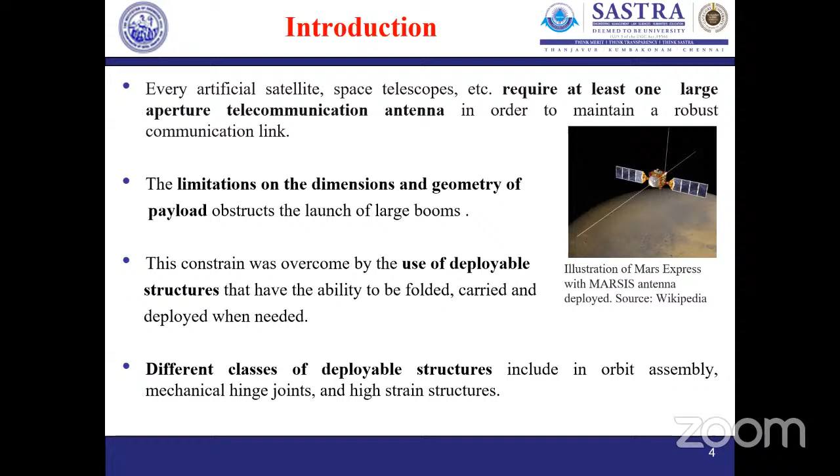I would also like to extend my thanks to my project supervisor, Dr. Srihari VM, Associate Professor in Aerospace Engineering, SASTRA. This is the outline of my presentation. Every man-made structure in space, such as artificial satellites, space telescopes, and even the International Space Station, requires at least one large antenna to maintain a robust communication link. But limitations on payload geometry and dimensions create difficulty in launching large booms. However, this constraint can be overcome by using deployable structures that have the ability to be folded, carried, and deployed whenever needed. There are different classes of deployable structures, including in-orbit assembly structures, structures with mechanical hinge joints as well as sliding joints, and high-strain structures. This work is mainly related to high-strain structures, usually constructed with high-strain composite materials. The motivation for including composite materials in space linkages is that booms made of composite materials are ultra lightweight and have superior stiffness and strength. They also increase packing efficiency with light weight, making missions more economical. The results from this work will be highly significant and relevant to space activities and useful for employing ultra lightweight composite booms in several aircraft mechanisms.

There are many numerous studies in the field of deployable composite booms. For the sake of brevity, I would like to highlight a few studies that are relevant even to my study.

Yee and Pellegrino in 2005 studied the deformation and strains induced by folding of carbon fiber reinforced composite hinge tubes. It was observed that the larger the folding angle, the firmer the tube hinge snaps to a straight configuration. However, we know that the smaller the folding angle, the lesser will be the strains generated.

Mallikarachchi and Pellegrino in 2009 studied the deployment dynamics of composite materials with an integral hinge. It was observed that the stress concentrations were high at the hinge region.

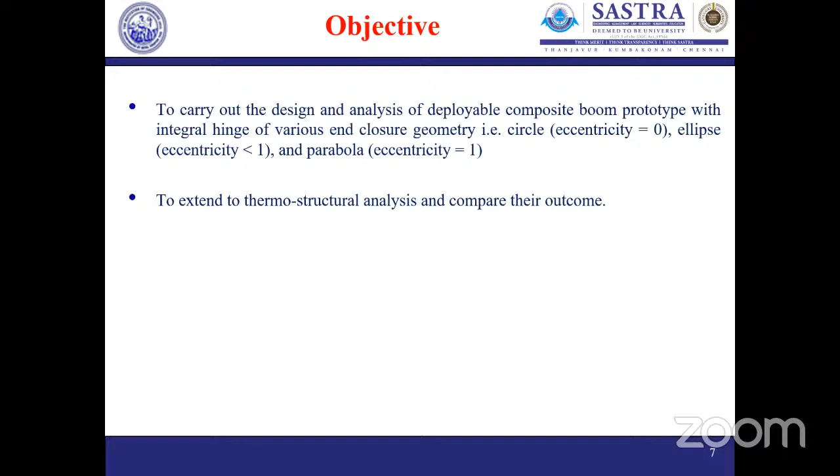Initially, we have performed a few validation studies in order to compare our experimental results as well as the numerical results. We have actually manufactured a deployable composite boom with a slotted hinge and with glass fiber epoxy composite. The material properties were tested at PSG Coimbatore.

In the software work, the boom was given cantilever boundary conditions and a concentrated tip load at the end.

Both the displacement values at both the ends of the slots were determined, which is actually at 75 mm and 155 mm from the root of the boom. It was observed that the deflections produced in the simulation as well as experimental results were more or less comparable.

The design for the current work is that we have designed 3 booms that have dimensions identical, but only the slot geometry is changing. So here, this is a boom having slot with a circular enclosure. The second one has an elliptical enclosure, and the third one has a parabolic enclosure. The coordinate system given here can be used to refer to the longitudinal axis, transverse axis, as well as the radial axis.

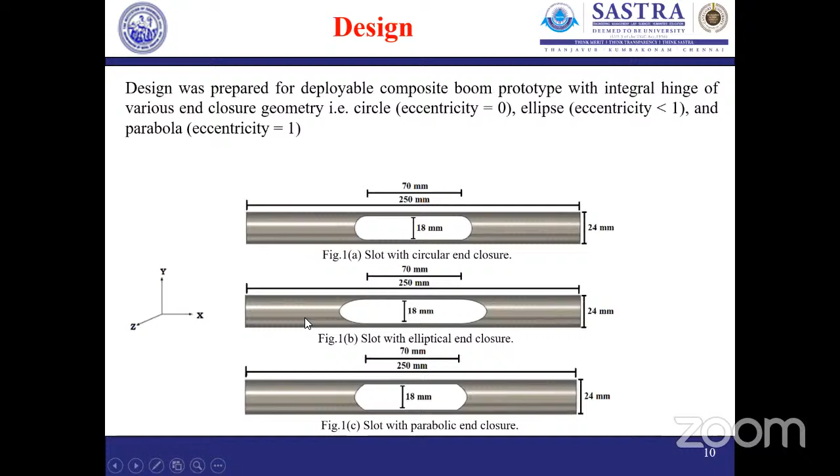Once the design of the composite boom was made, it was assigned the material properties of unidirectional epoxy carbon. Two layers of composite fibers, each of thickness 1 mm, oriented at 45° and minus 45°, were used to create the boom.

So the boundary conditions are: one end of the boom is fixed, and there is a tip load applied at the other end. This tip load was applied in all three directions in order to account for the various loads the boom may be subjected to during and after deployment in space.

From the test, we understood that significant results were found only when the boom was loaded along the direction where the deflections were along the direction of loading. These maximum deformation values were tabulated and are presented here.

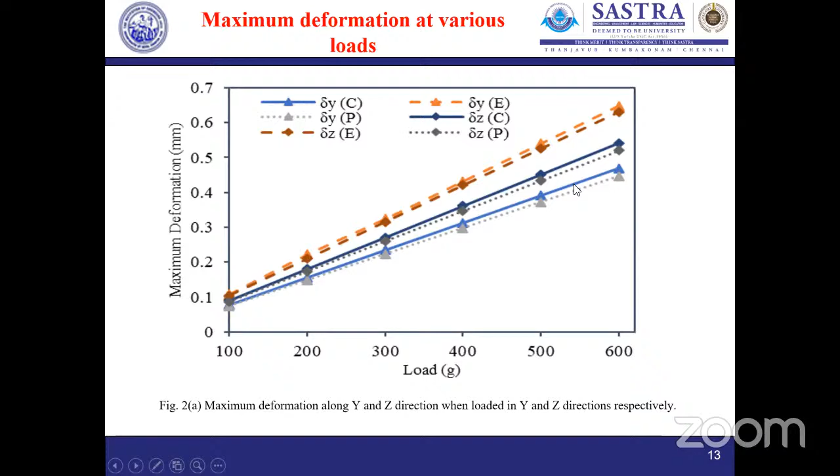Given that the boom can be exposed to various temperatures, an investigation was carried out with a temperature variation of 73 Kelvin to 973 Kelvin. As epoxy degrades at further higher temperatures, cases exceeding 700 degrees Celsius were not explored.

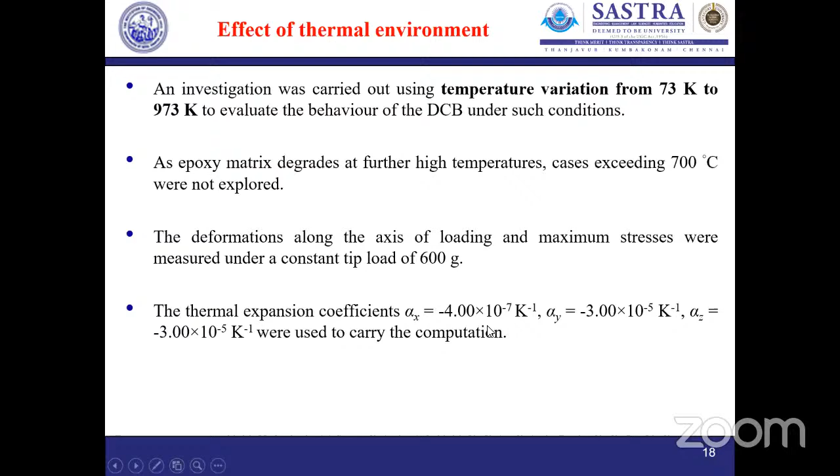Even under thermal environment, the deflections in the elliptical boom with an elliptical enclosure geometry has maximum deformation. But here, the boom with a circular enclosure geometry has lesser deformations as compared to the previous study under control room temperatures.

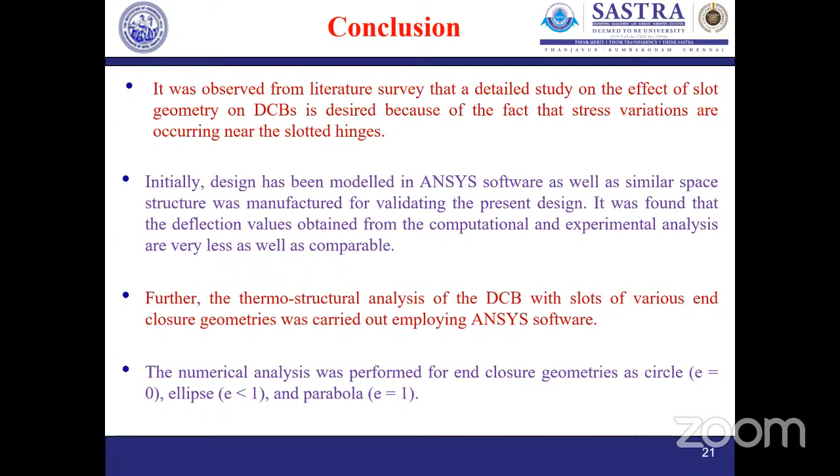It can be observed from the study that the boom with a parabolic enclosure shows a better overall performance under controlled room temperature as well as various thermal environments. The deployable composite boom with slotted hinges of 2 layers has stress strain generated values of lower magnitude, which proves the relevance of the present design.

Thus, it's important to quantify the effect of slot geometry in deployable composite booms with slotted hinges, and several parametric study results are presented to highlight the significance of the present design in space application.

We would also like to extend our study to a lenticular boom, a deployable composite boom with a lenticular cross section.

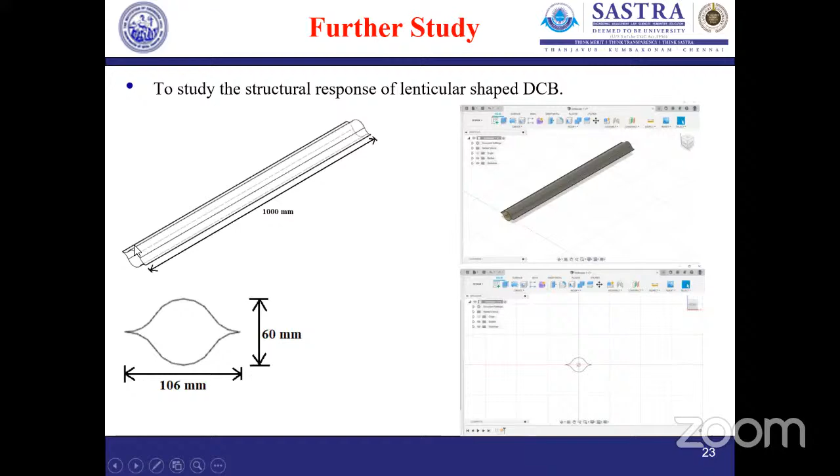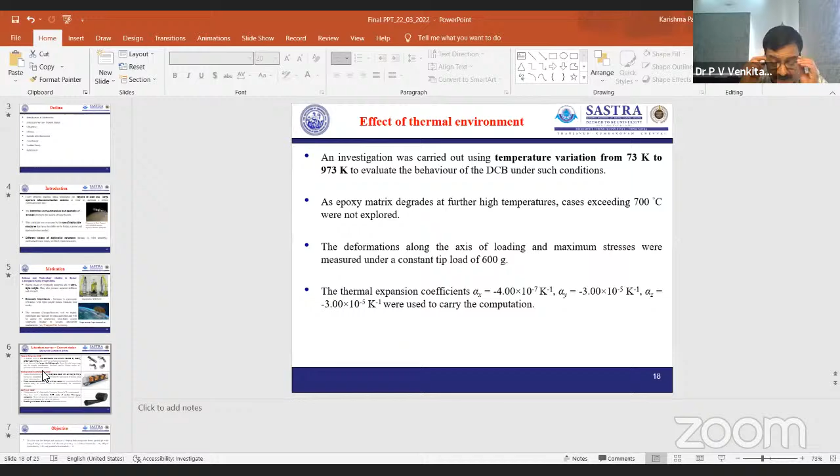And what actually deployable booms are in the space already - once it is reaching the space, you are deploying it. Am I right? Yes, sir. Then the thermal effect is the radiation what is coming. Am I right? Yes, sir. So the radiation will not be uniform actually. The radiation will be different at different times and different angles depending upon the sun, everything and all. So the study was limited to, what temperature have you been varying the temperature from? 73 degree to 973.

And what are the increments you have given for temperature each time? 100 degrees Celsius, sir. So from 73 to 973 is around 8 studies. Am I right? Yes, sir.

Any effect of any temperature load combination? Did you notice anything more, was it linear, or did you notice any abnormality? Because the geometry will not be uniform actually. Deployable antenna geometry also, the hinges and all - it is not a totally uniform structure. So what will be the effect of the combination? Anything specific to some temperature load combination? Anything more or less?

Anything did you infer from the studies? What did you conduct? Sir, we have only considered the maximum loads, maximum stress values. Maximum temperature, maximum load. No, sir. Maximum stresses that will be in the boom.

At what temperature load combination was having the maximum stress? Sir, as the temperature increases, the stress value is going to increase, sir. There'll be more thermal stresses induced. So whatever you showed was linear. Am I right?

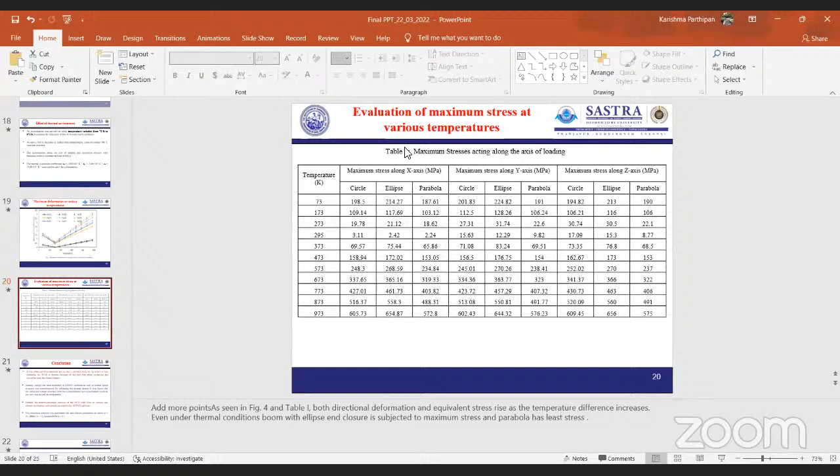No, sir, the graphs shown were almost linear. Am I right? Yes, sir, yes, sir. It reduces and increases. Yes, sir.

So you are concluding parabola is the right one. A parabola seems to perform better than the other two geometries, sir.

Okay, why lenticular? Next study, what is the peculiarity of that particular cross section? Sir, this can be folded and rolled up, so it will consume much less space than the booms.

Okay, so it's a study actually. I would like to comment one thing. The parabolic shape seems to be better, definitely, but there should be some ratio of the minor axis and major axis which will play a role, and the remaining wall thickness. These parameters will also be relevant. Now, you have studied a particular case of wall thickness. Am I correct?

Yes, sir. After the cutting of the particular shape, there is a remaining thickness in the shell. That is one parameter which decides the stress. Then the cross section parabola is, of course, better because it is a better cantilever, if you say that way. But the shape of the length, major axis and minor axis, the ratio also may decide the stress levels.

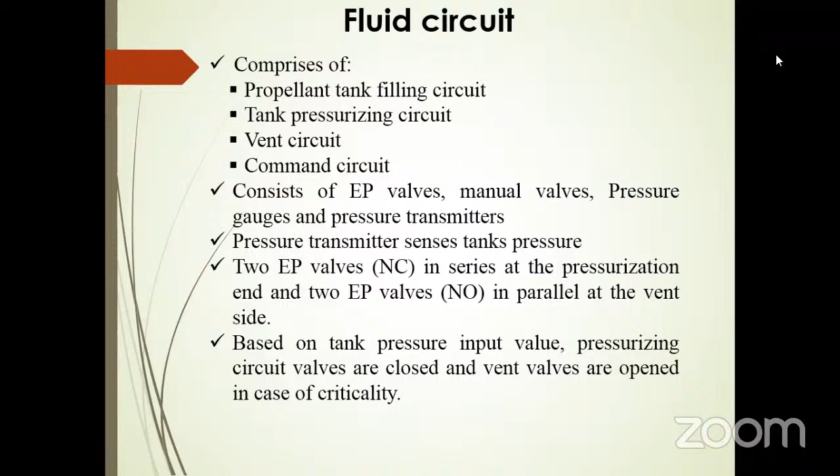For example, if the hardware is a propellant tank, the ultimate pressure of the tank will be mentioned as per mission requirements, for example 9 bar. So if the ultimate pressure is 9 bar, we will set the interlock conditions at 1.03 times 9 bar, that is 9.27 bar. Interlock conditions will be set whenever the pressure of the particular hardware exceeds 9.27 bar.

Whenever the pressure parameter of the tank exceeds this low or high limit, the corresponding safety action will be taken, that is, closing EPV 1 and 2. As mentioned earlier, the two EP valves at the pressurization end, EPV1 and EPV2, will be closed if the limit value is exceeded, and the two valves at the vent side, EPV3 and 4, will be opened.

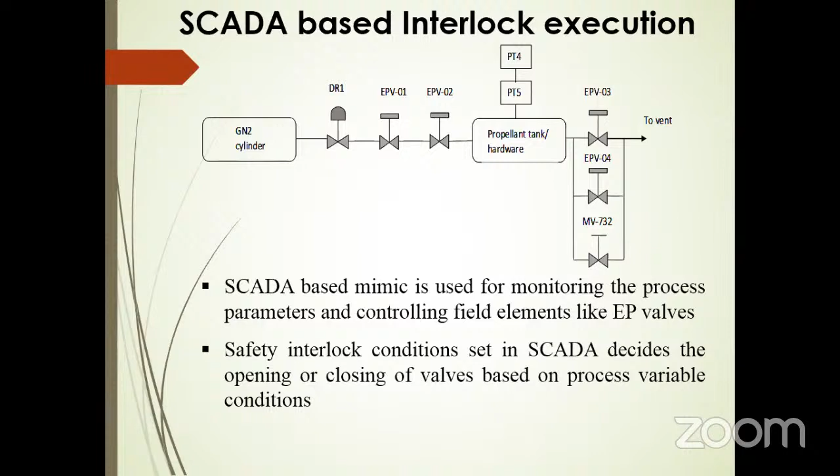Now the question arises: all these interlock conditions are set in the PLC-based SCADA system. So what happens if the PLC fails? We are using a single standalone PLC which can't tolerate any failure. So if the PLC fails, upon exceeding the limit value, there will be a catastrophic failure.

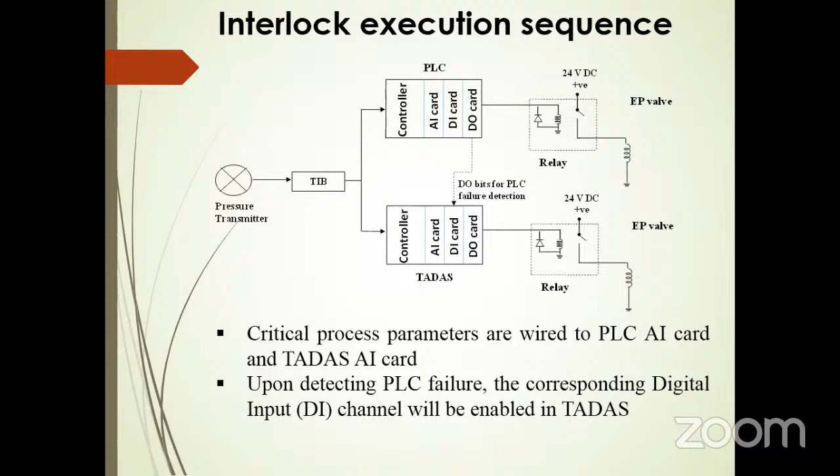Now in the test article data acquisition system, the corresponding digital output bit will be enabled based on the analog input value from the pressure transmitter, as well as the digital input value from the PLC indicating the failure detection. Using the corresponding digital output bit, the electro-pneumatic valve will be actuated based on the interlock conditions.

Now this is the result while executing the interlocks using the test article data acquisition system. The first graph indicates when the pressure parameter comes below 0.7 bar. This is with respect to the interlock table shown in the previous slide, where the low limit was 0.7 bar and the higher limit was 9.27 bar. So the first graph shows when it comes below 0.7 bar, the pressure value becomes 0.699 bar.

During that time, the interlock logic got enabled in the test article data acquisition system, and the corresponding digital output becomes 1. The time difference between crossing the limit value and enabling the interlock was estimated to be 20 milliseconds. Similarly, in the second graph, the higher limit taken was 9.27. When it crosses 9.27, that is 9.271 bar, the corresponding digital output got enabled, and the delay observed was the same, 20 milliseconds.

So these interlock conditions, simulated in the data acquisition system with a sampling rate of 100 Hertz, show a maximum delay of 20 milliseconds. However, in our PLC with a cycle time of 100 milliseconds, the maximum delay for interlock execution was found to be 400 milliseconds.

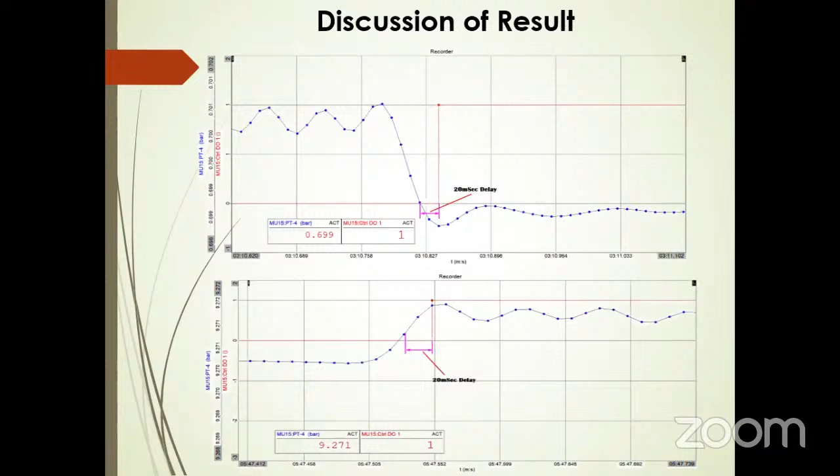You are now talking about more of the logic here than the actual area. Your paper is about the logic you built in and its implementation. Yes, sir, your focus is on that. Yes, sir. Okay.

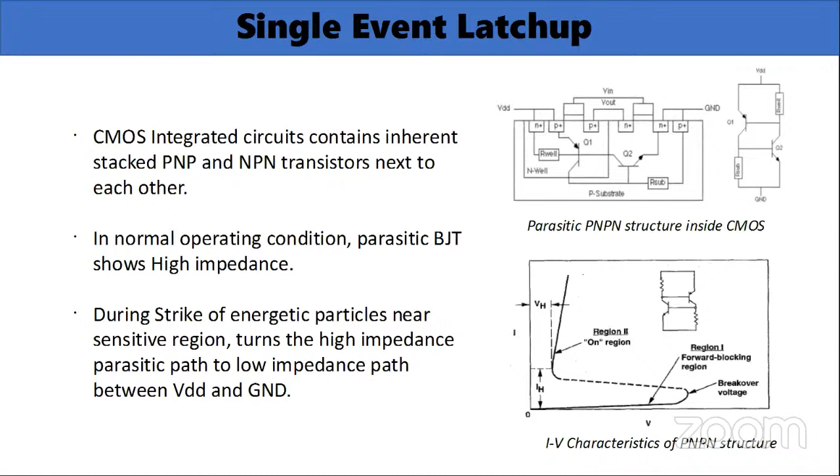Some conventional ways to protect the device from this short circuit phenomena are: first, silicon on insulator technology. According to this, N-well and P-well are made over an insulator, which are further used in making PMOS and NMOS respectively. Due to use of insulator, the parasitic NPN and PNP transistors themselves are not formed, so this technique is free of latch-up events.

However, this process is a little bit costly. Another method is the use of a series resistor, which limits the current and provides safe operation of a device, preventing the abrupt increase in current. But this is not a power efficient solution, because in normal operation also some current will flow through the resistor and it will dissipate power.

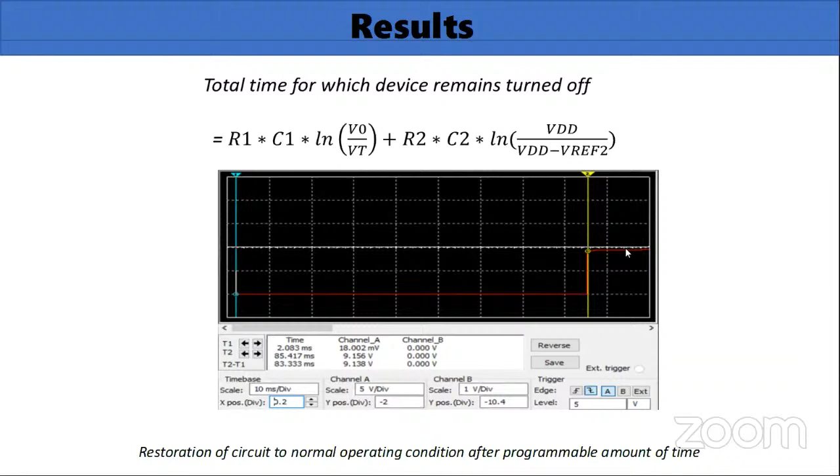So here we can conclude that with the proposed circuit, our circuit provides a current limiting feature with a power efficient solution, ensuring the safety of flight devices. The turn-off time can be programmed as per the requirement of the electronic device, and it has a provision to use with a wide variety of devices. It enhances the reliability of electronic components. Thank you.

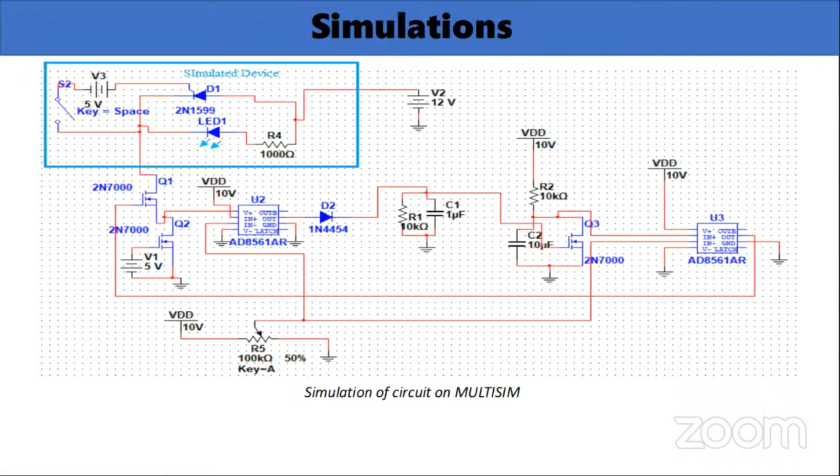Yes sir, because the idea here is whatever the response time of the circuit would be, the current will not flow more than the saturation limit of our MOSFET, this Q2. So whatever the VGS voltage we are giving here, it will just put the device into saturation region such that the current limiting will not exceed the maximum allowed current of our device.

Yeah, so that's a good thing. So there is not going to be any surge because of the introduction of the circuit, that's what you are telling. No. Okay, right. Anyway, it's good study, good product.

It introduces a safety lock in between and avoids a critical failure of the system. Very good, it is, yeah.

Whether your design review, everything is over for this. Actually sir, right now just we have made a simulation on MULTISIM. The design is still in progress, as we will do it. Yeah, probably look at the failure modes also in more detail. Okay sir, it's a good study, of course.

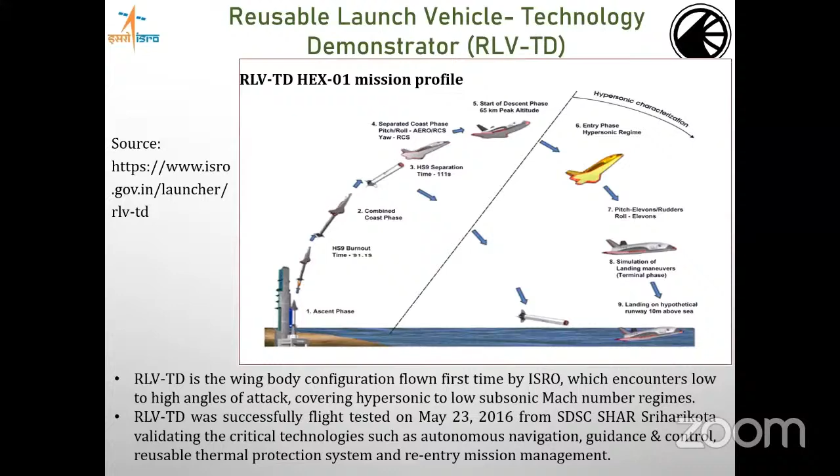So this is where we studied the re-entry characteristics of the RLV body itself. It was very essential, and this validation study was helpful in understanding the autonomous navigation, guidance and control, and TPS systems, that is thermal protection system, and re-entry mission management, which will be helpful for our future human mission project also.

As I said, this reusable launch vehicle in the ascent phase is attached to a solid motor, which I have just touched upon, so I need not go over this again. In this case, basically the various compartments are involved for the venting process. As you can see, the nose compartment, fuselage compartment, wings, vertical tail, elevon, rudder, all these things are there.

But in this study, the wings, fuselage, and nose skin compartment are all interconnected through internal connections, whereas rudder, elevon, and vertical tail are treated as single separate entities. In the ascent phase of the flight, the RLV vehicle is connected to the booster compartment or base load compartment through these wire tunnels, which are shown here. And these fin compartments are also treated as separate ones.

So there are a number of compartments which are there for the purpose of venting. If you see a typical launch vehicle, we have a number of compartments that vary from a payload fairing compartment to a base load compartment, and interstage compartments are also there. So why do we do this venting?

Because as the launch vehicle is on the launch pad, when it is integrated, the internal compartment pressure, or the air volume stuck inside the compartment or structure, will be at ambient conditions, that is at 1 bar. But as the vehicle lifts off and ascends towards space, the outside pressure will be dropping down. And if the entrapped volume of air is stuck at 1 bar, the difference between these two will create a pressure differential, which may cause structural damage if it exceeds the limits.

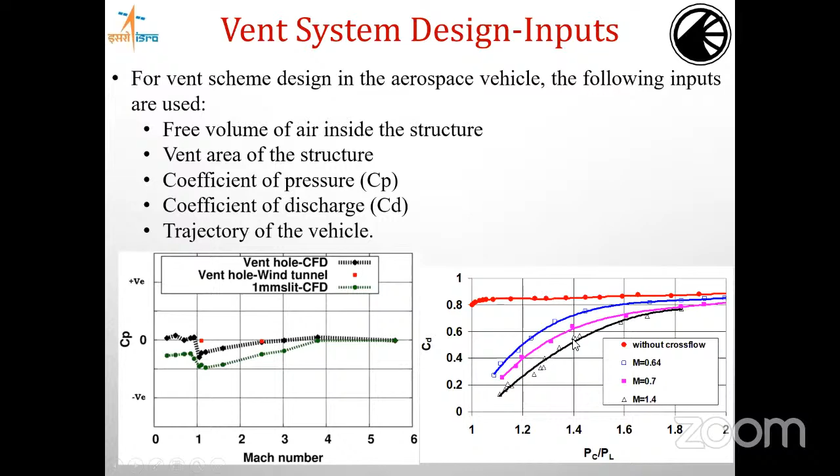So sir, you are seeing coefficient of pressure on the left-hand plot, and these are the typical CP variations what we have observed on the ascent vehicle vent stage. I'll touch upon exactly where the CP values were. And this is the discharge coefficient for the particular vent system which we have flown in the RLV vehicle.

As I said, in this compartment, the nose compartment or the fuselage compartment and wings compartment are all interconnected during the ascent phase of the flight. Hence these have to be vented out through a common path. Since it is not independent, it is attached to the interstage compartment, and further it is connected to the HS9 motor. So the interstage compartment takes care of the vent system during the ascent phase of the flight.

So we are providing venting provision in the interstage compartment. We had 2 cooling hoses which are generally supplied at the launch pad, so that the electronic package sitting inside the fuselage compartment of the RLV is cooled or brought down to the minimal temperature required. We had that also as a venting system, and we provided dia 50 mm vent ports, or vent holes, in the interstage compartment for venting during the ascent phase. So all the air entrapped in the fuselage compartment will be vented out through this interstage.

And further down, it is connected to the base load compartment through this wire tunnel. So some chunk of the volume of air also will be transmitted to base load, and base load has its own venting system which has 6 vent ports in the base load region. So this is all a connected compartment study, and the typical signature is also seen in our conventional launch vehicles like PSLV, GSLV Mark III, and GSLV as well.

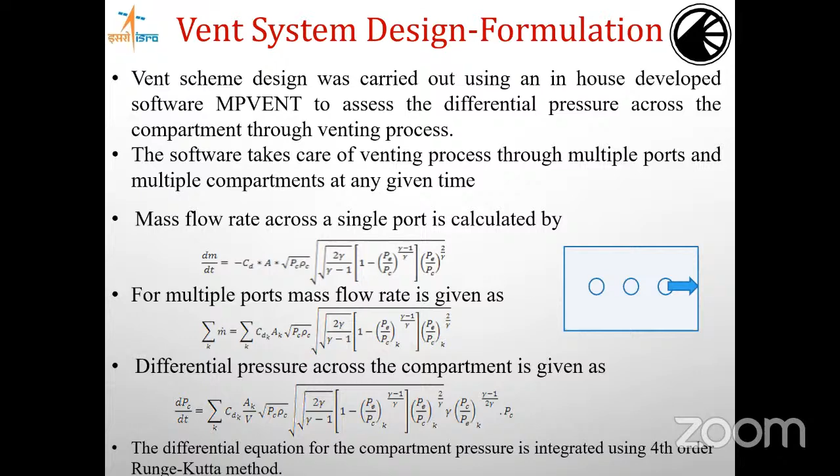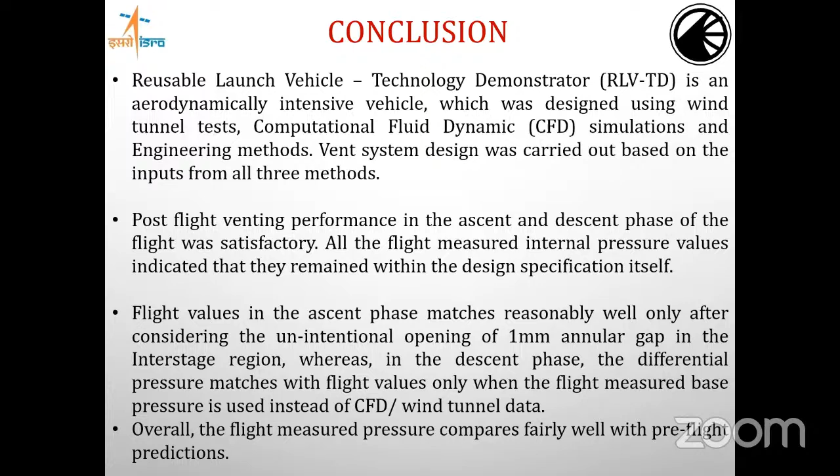Post-flight venting performance in the ascent and descent phase of the flights was satisfactory, meeting our design specification of ±10 kilopascals. All flight measured internal pressure values remained within the design specification. Flight values in the ascent phase match reasonably well only after considering the unintentional opening of a 1 mm annular gap in the interstage region, whereas in the descent phase the differential pressure matches with flight values only when the flight measured base pressure values are used instead of CFD or wind tunnel data. Overall, the flight measured pressure compares fairly well with the pre-flight predictions.

These are the references which have gone into the studies. Thank you, sir. Any questions?

Yeah, thank you, Mr. Venkat Shivanand Yadav. One or two questions I have.

Even though you said in the conclusion that the design has been carried out based on CFD and wind tunnel tests, essentially you have gone by the configuration constraints or configuration requirements. That's what I have seen. For example, the interstage connection below the flight stage, you have vent ports located there. But I feel the aerodynamic characteristics will be totally different in the ascent and descent phase. So some of the ports provided for venting during ascent may be detrimental during descent. Do you have some view on that, or are you using check valves or anything like that? These are the two things I would like to clarify from you.

As I said earlier, during the ascent phase of the flight, we have only vent ports or vent holes drilled in the interstage compartment, and venting was done only through that compartment. But after separation, the interstage compartment will not be there for the descent phase. So the vent system provided in the base region is the only way to vent it and provide the necessary pressure inside the structure. We intentionally created those vent holes and cooling connectors in the base region during the design phase of the study.

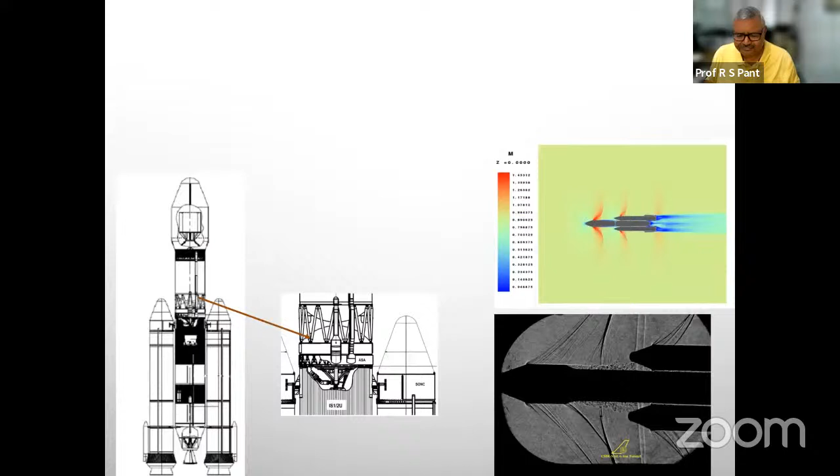This is a typical payload fairing you are seeing on my screen right now, showing the vent port used for payload fairing in GSLV and PSLV type vehicles. Similar unintentional vent areas, as I predicted earlier, are seen in other compartments of the launch vehicle. This is the GSLV Mark III X flight, and there too we have seen this kind of unintentional vent area, which led to the negative differential pressure I was mentioning earlier. So these observations are seen in other flights also, and we have fairly validated this with our own software, MP Vent.

Okay, thank you. Anybody else have questions? Otherwise we'll move to the next paper. Okay, thank you, Shivaram. Thank you, sir. Thank you for giving me this opportunity.

Sir, one small interruption here. Actually, Mr. KM Kiran Babu — Mr. KM Kiran Babu, are you ready to present your paper, sir?

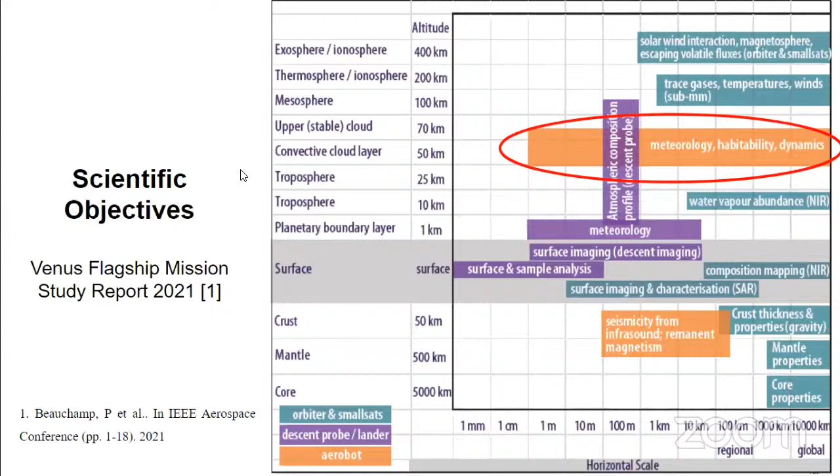According to the Venus flagship mission study report, aerobot systems, that is lighter than air systems, are perfect for carrying out atmospheric dynamic studies in the upper atmosphere of around 50 to 60 kilometers. If you look at the horizontal scale, the requirement is global circulation and global measurement in the Venetian atmosphere. In this region, the atmospheric properties are comparable to that of Earth, and materials are available for balloon systems.

Previously, there have been multiple missions to Venus, and among them, Vega balloons have demonstrated the flight of balloons in the Venetian atmosphere. From these missions, various atmospheric properties had already been collected, and a Venus International Reference Atmosphere model was developed by NASA, which we initially planned to use for these atmospheric simulation studies.

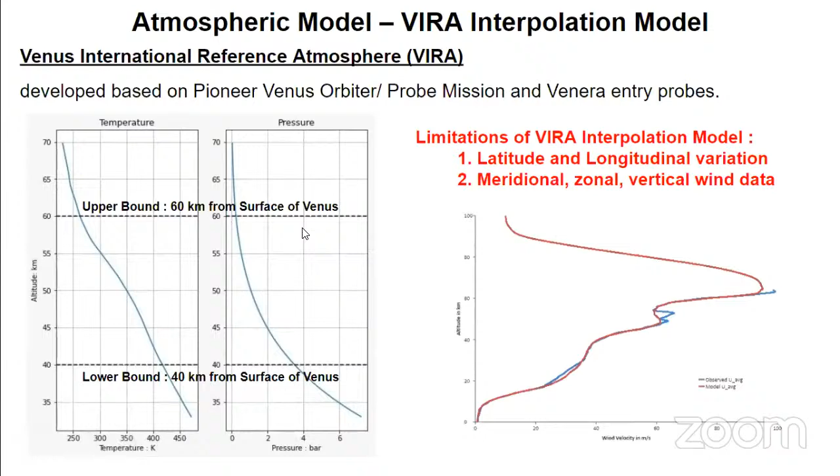However, there are certain limitations of this atmospheric model, in that the latitude and longitudinal variation of atmospheric data is missing, and the wind components in this region are also missing. Therefore, we approached Dr. Sebastien Lebonnois of LMD Lab and Dr. Prashant Kumar of Space Application Center and obtained the general circulation model data to have atmospheric variables and wind parameters in 4 coordinates, namely altitude, longitude, latitude, and time in the Venetian atmosphere.

This atmospheric data was interpolated in 4 dimensions with a linear interpolator to couple it with the trajectory simulation. Coming to the superpressure balloon, it is usually partially filled at launch and gains the float altitude at its design volume.

In our current model of trajectory simulation, we have also considered the thermal heat transfer that happens because of the atmosphere on the balloon film, as well as the lifting gas. So we first developed the trajectory model for an Earth balloon and validated it with the HASI balloon flight, and then we adopted the trajectory model for the Venetian atmosphere.

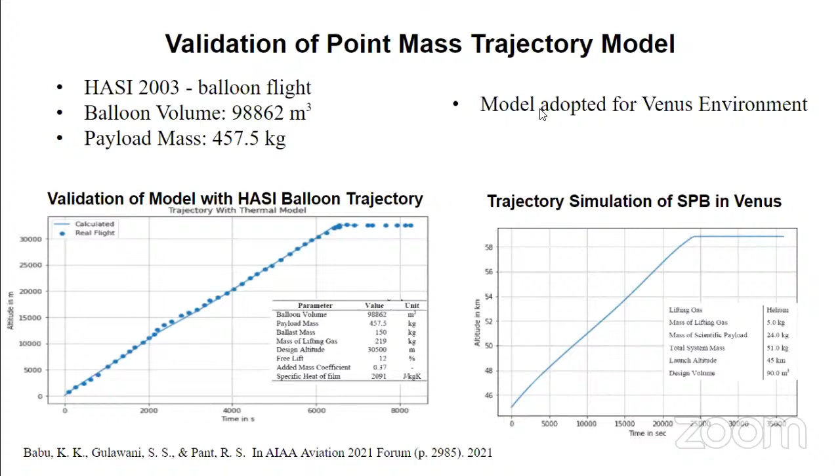Please proceed, any problem? Got stuck, Mr. Ashok? Maybe any internet issues, sir. Mr. Ashok, are you there? Mr. Ashok, can you hear us? Ashok Kumar, you mean Ashok Kumar? Yes, Mr. Ashok Kumar, sir. Yes, I am able to hear you, but I'm not seeing anything on the screen.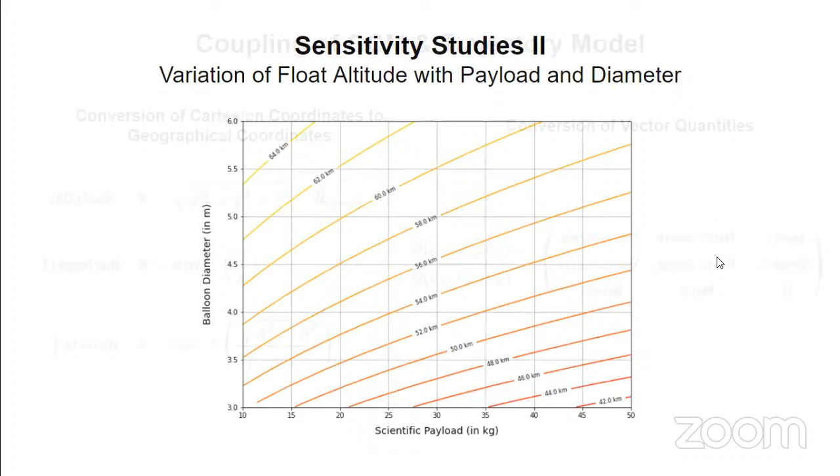Trajectory model for carrying out simulation of the float phase, which is essentially the circumnavigation around the planet. For that, we had to convert the Cartesian coordinates into geographical coordinates, and similarly the vector quantities for velocity were converted from zonal wind, meridional wind, and vertical wind into the Cartesian system.

We finally got the circumnavigation trajectories. The balloon was released from 50-kilometer altitude at 3 different latitudes and 0-degree longitude. It was observed that the revolution in the northern and southern hemisphere covers more area, completing around 2 circumnavigations, so 2 revolutions.

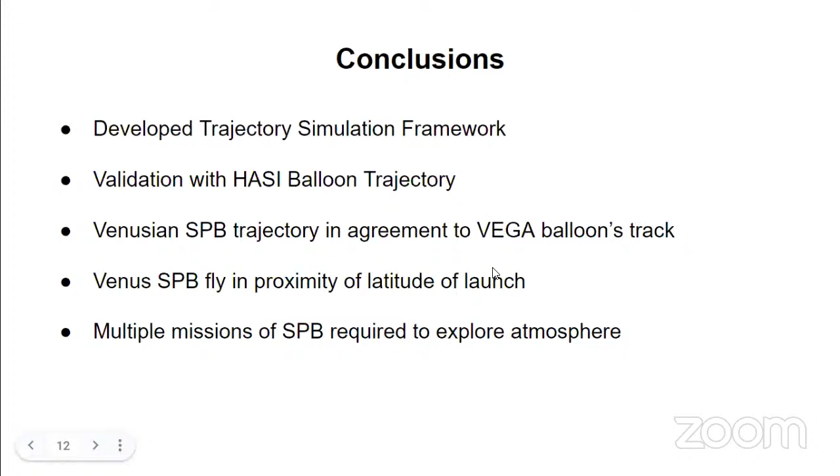Finally, we conclude that we developed the trajectory simulation framework and validated the trajectory with the HASI balloon experiment. When a superpressure balloon is flown in the Venusian atmosphere, it covers area in the proximity of its launch latitude, and therefore it will require multiple missions of superpressure balloons to explore more area of the Venusian atmosphere. Thank you.

Thank you, Kiran Babu. So the question session is on, any questions? Okay, I think we will go to the next paper then.

So right now, Mr. Jitendra Singh is not in the panelist list. Professor Pant will be sharing that paper. Is he available, Professor Pant? Just before he was here, but right now I don't see him in the panelist list. He's just joining. Okay, Dr. Rajkumar S. Pant.

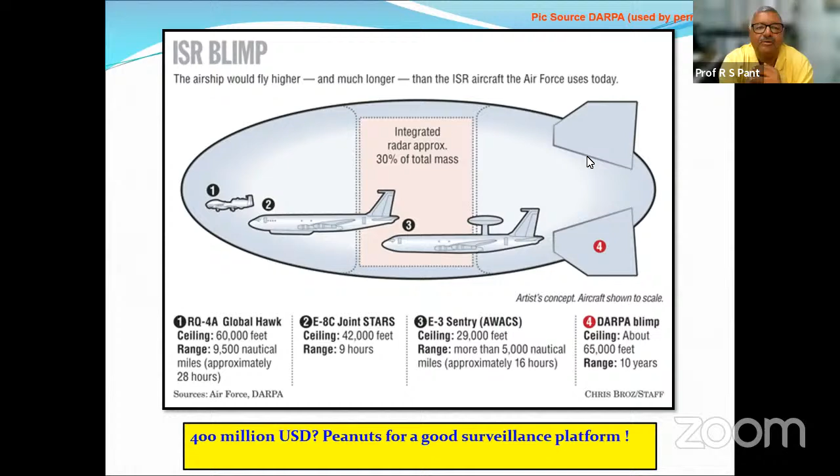Now, as we are looking mainly at military and paramilitary roles in this presentation, we notice that several applications can be tackled by the use of high altitude airships. In the current scenario of our country, when we are grappling with two unfriendly neighbors at both edges, on the western side as well as on the northeastern side, immediately one can look at any of these as a relevant application for the high altitude airships.

There are many similar roles, but I'm not going to focus on that much today. I always say that applications are generally limited by imagination.

Now, many people would argue that since we have satellites and our country is known for very cost-effective satellite deliveries, then why are we looking at airships? The reason is that we are going to make this airship behave like a low-altitude geostationary satellite. As you know, geostationary satellites normally fly at very high altitudes, and because of the huge distance, we do not get the required amount of clarity many times. Low Earth orbit satellites have better clarity, but then they are not able to maintain station.

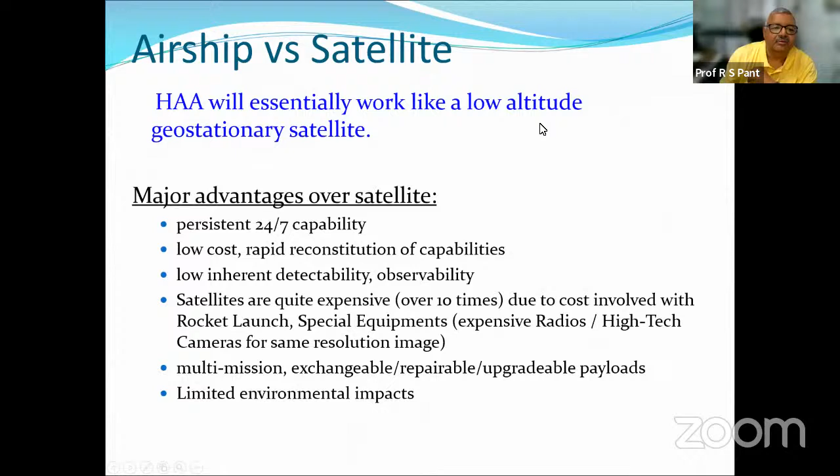In the Indian context, there are many applications. We could cover our entire country and its sovereign borders using just a handful of aerostats or high altitude airships. For military and paramilitary missions, there could be applications which are the need of the hour, as mentioned in this slide. Even civilian applications like resource mapping or supporting other activities from a safety point of view, refineries, etc., show that there are many possibilities.

It can also be relocated so that it can monitor the area of interest. And as I already showed, areas of interest can be covered by a swarm of high altitude airships.

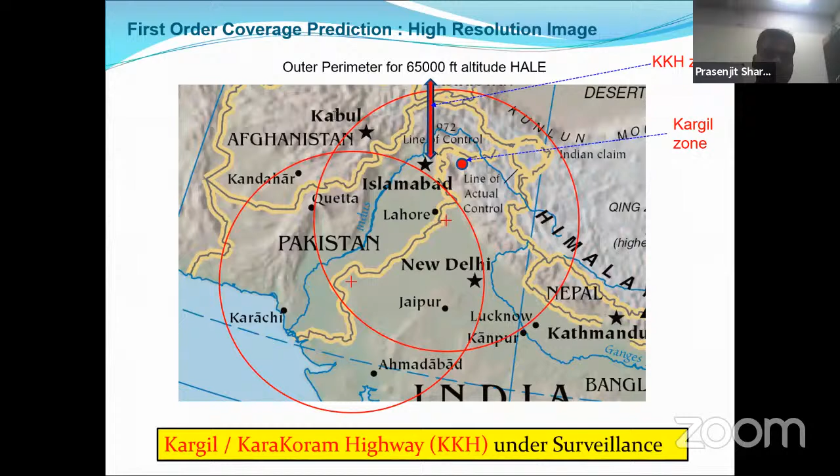In the context of our neighbors, the Karakoram highway and the Kargil zone is an area where there is a huge requirement. If we are able to position these over the sovereign territory of the country, as I have already achieved, you can see that with two of them we can cover almost the entire area of interest, on both the Chinese front as well as on the Pakistan front.

To focus more on the Karakoram highway, which is the connection between China and various cities in Pakistan, locating a system within the line of control or within Indian territory or Indian controlled Kashmir territory can easily allow us to look at what activities are happening and take decisive and preemptive action well before the activities become difficult for us to manage.

Similarly, there are other areas highlighted here in this figure which can be monitored very easily.

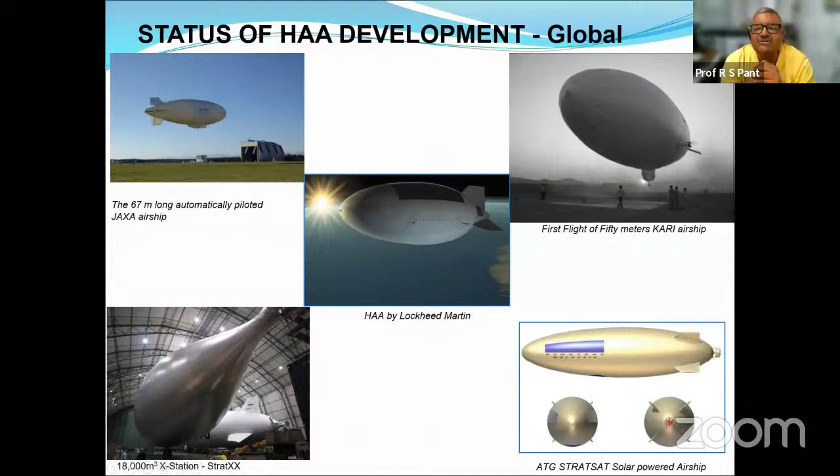But then there are lots of issues and risks which we have to handle. There are several technologies which need to be mastered and developed, and there are also certain areas in which we are behind, as I will elaborate in the slides as we go ahead.

So the question that arises is, all this is okay, but does India need a high altitude airship? Definitely we have a need, and more so in the current scenario. So what are the technologies which have to be developed?

First of all, the basic envelope itself at such a large size, we cannot use existing materials which are very heavy, and also the fabrication techniques have to be improved. You cannot carry any conventional power plant system for a long endurance application, so we need to look at solar powered systems with regenerative fuel cells.

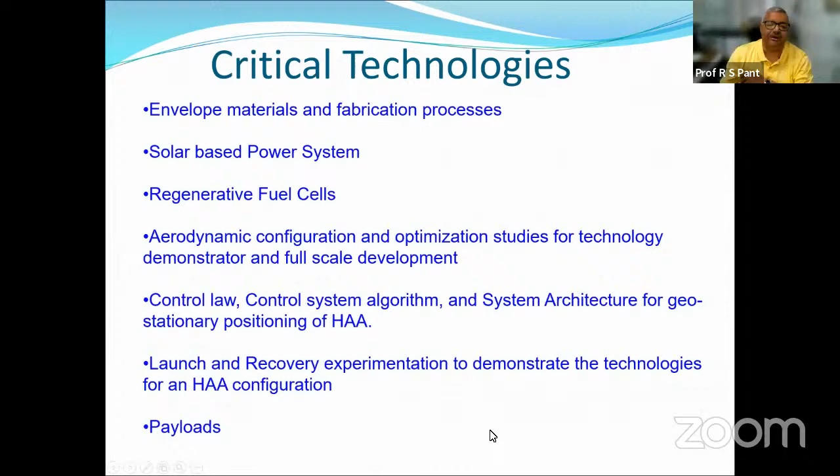As we have already done, a lot of aerodynamic configuration and optimization studies are needed for the full-scale development. The control of the whole system has to be mastered. Launch and recovery of such a large body is going to be a problem, and remember, it has to also go through that location of very high speeds.

We have to also develop the required payloads to do the mission that is required. So in the next few slides, we'll highlight, based on our study, what technological jumps are required. For instance, the target fabric that will go on this airship should be less than 100 grams per square meter, or GSM as we call it. In India currently, we are looking at around 250 to 300 grams per square meter.

The pioneer in this particular area is ADRDE in Agra, the DRDO laboratory, which has done a fantastic amount of work in the development of technology of LTA systems in the country. They are the leaders in this technology in the country. But they need to be given a lot of support and encouragement, because the requirements are that we need to improve material by 3 times, improve fabric strength by 2 times, and permeability is going to be a huge issue.

Similarly, on the solar cell front, we need 20% improvement and 4 times improvement in the power density, in watts per square meter. Especially looking at solar cells, there are many challenges and a lot of research going on in the country. We at IIT Bombay are also working on developing these kinds of cells under one of our National Centre for Photovoltaic Research and Education.

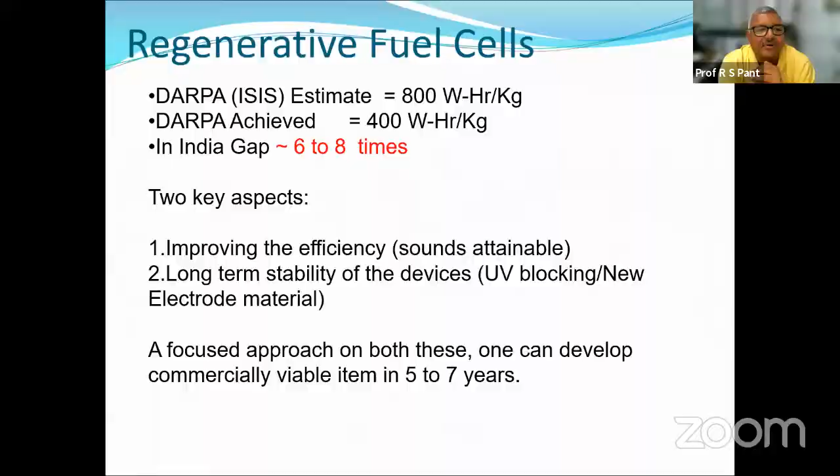I'm actually unable to give more than I have. So with that, I'd like to stop and open the floor for any questions that you may have.

Helium permeability. Any metal coating inside the fabric or anything like that can be considered?

Yes. First thing I want to clarify is that for such a large platform, we cannot think of using helium in a sustainable manner, because...

I think there are some network issues, sir got disconnected. But he is probably not aware, he is continuing. I think there is a problem here. Yeah, we are losing connectivity. Yes, sir, right now.

I'm just saying that helium is not going to be a sustainable solution for such a large airship. We definitely have to go back to hydrogen as the lifting gas. Even though there are dangers in using hydrogen as a lifting gas, and we all know people are very scared, there have been several studies done, even in IIT Bombay we have done experiments in the field to show that handling of hydrogen, if done very carefully, can be considered as an option. Because if you go for helium as a lifting gas, then your system is going to be almost unsustainable from the point of view of logistics and refurbishment.

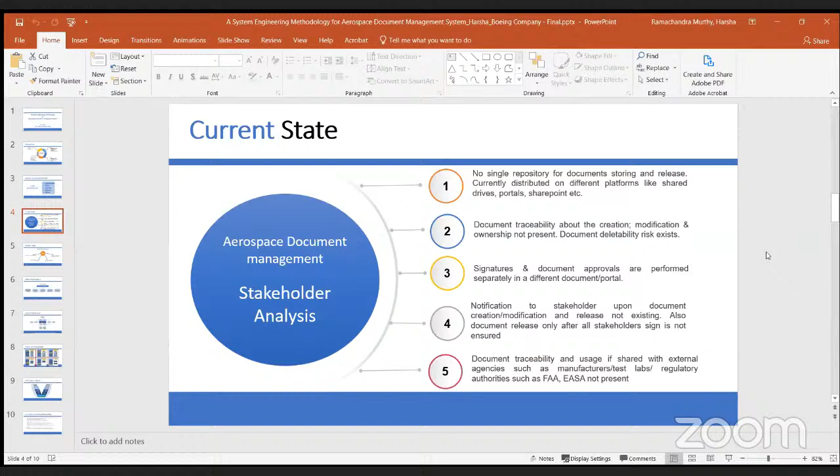And finally, these documents, when shared with external vendors - manufacturers, test labs, or even regulatory bodies like FAA and EASA - how they use our documents and where they flow down, we had no clue about it. That's why we also wanted to bring that online within our system, to understand the traceability of our document once shared externally. So these were some of the major points we listed as the current state, what was there previously, versus the desired state, what we actually want out of this newly developed system.

That is, we will have a common repository which will contain all the documents as a single platform for document storage. Then document details of creation and modification, that is, the traceability and modification details have to be tracked every time it is done.

Third one is the signature and document approval should be embedded within the system. And finally, notification to stakeholders for creation or modification of the document will be there. And all of this will contain the system to trace back when it is shared externally as well.

So these are some of the common pointers, and we noted this as our first step in defining requirements, in systems engineering language, as an integrated platform which will have a unified platform for document storage, metadata recording, approval and signature, notification, and access with data security, that is configuration control. Then, how do we specify the performance of our document management system?

The integrated platform, if we read it as a cyclic flow, we will be checking in the documents, that is, we'll be starting to store the documents in this integrated platform. Once it is stored, then it will undergo a review, that is, actual review by the stakeholders.

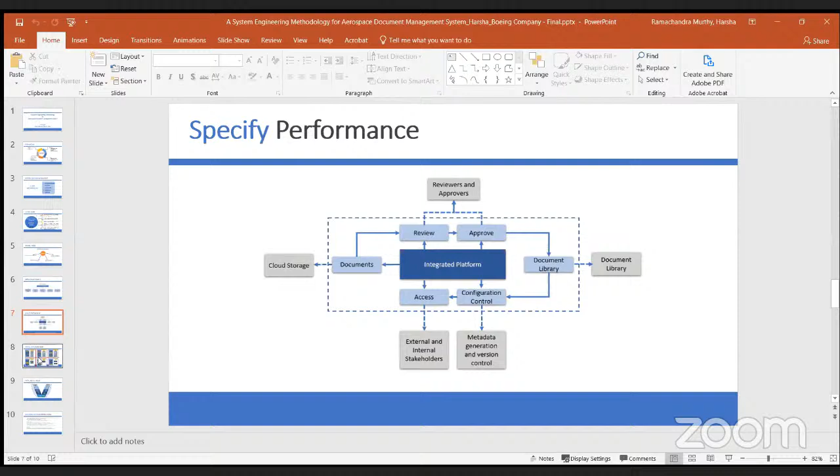Yeah, this looks a bit crowded. But nevertheless, I'll briefly discuss one of them, and I think the rest of the things are similar. And this is not exactly the way we have put it across in our organization.

We have a proper user interface, but unfortunately, I could not get the approval to share that externally to this forum. So that is the reason I've just put up these block images to share what we have done. So in this integrated platform, as we defined all those requirements, we had these basic six modules which were developed.

One is for the documents, that is, if at all a new document is to be created, or upload an existing document, check in a revised document, and finally download for all stakeholders if they want to download a copy of the document.

So the review process of the document, where we assign stakeholders, we put an end completion date, when do we need the document to be reviewed, then what is the priority, and then finally, after all these inputs have been done, route it for review for the stakeholders.

Then approve, similar to review, where the signatures will be done. And the release, where once all the signatures are done, then the release process happens, where the document is available as a released document. And for configuration control, once this is checked in, the document will be assigned proper numbers and versions.

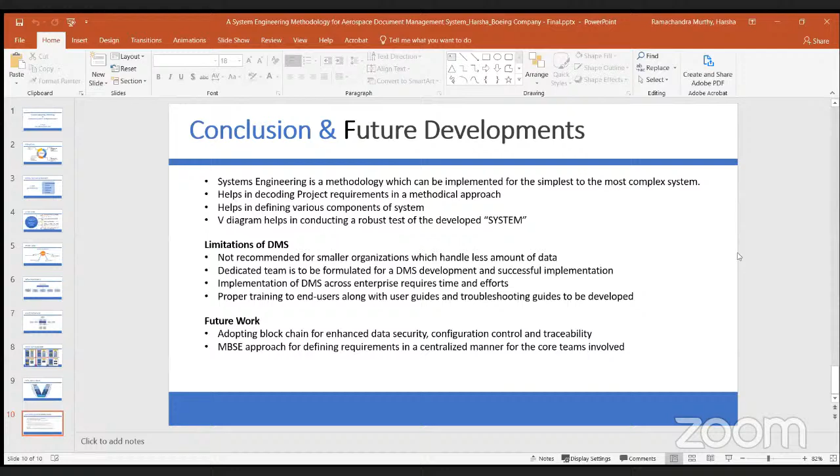Thank you, Harsha. It was different altogether because you are all aware that when it comes to manufacturing, translation to reality from drawing and documents to systems, especially companies like Boeing, whose supply chain is going across continents and countries, systems if they are not in place can really cause a lot of harm to the product as well as the actual final product, and all these things are very important.

One thing I would like to share here is that what you told is systems implementation can make huge profit. That's one message you have given very clearly. The profit is not by sales alone. Lean manufacturing, from Japan and all, addressed value engineering, but they addressed actually the product and product-related features only. System-related features can add value to engineering, and lean manufacturing can contribute to manufacturing. It's one important concept which we have followed but forgotten actually.

Here, you have told very clearly that by implementing the system, you've got a huge profit. And that is one message people have to carry, because a system which is in place is equal to a robust company actually, because people can change and systems can continue. That is the importance of systems engineering, which you have very clearly given.

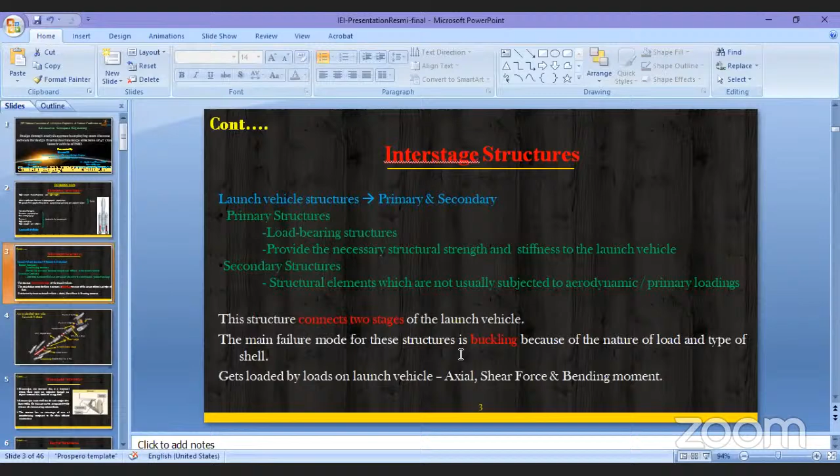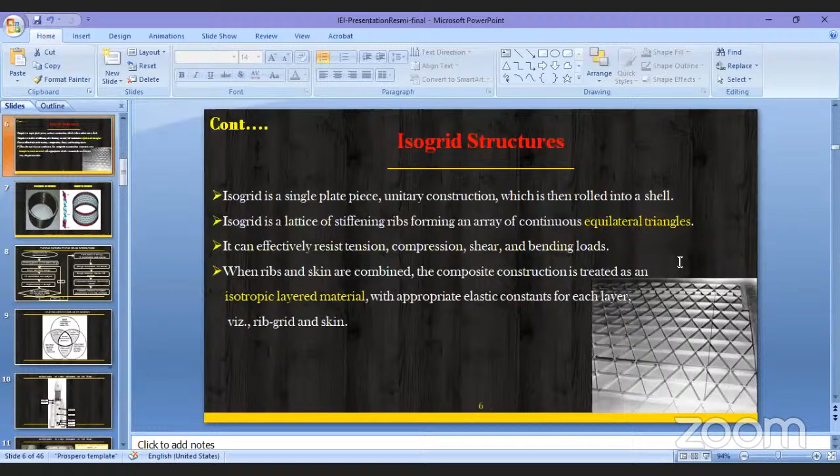We have different types of constructions available, like monocoque, closely stiffened, isogrid, waffle, etc. Monocoque is similar to an eggshell, with a skin alone. If you strengthen it with ring stiffeners and longitudinal stiffeners, you get a closely stiffened construction. If the stiffeners are very close together, these are closely stiffened structures. There are also equilateral triangle arrays of ribs - these are isogrid structures, which are effective in resisting tension, compression, shear, as well as bending loads. There are closed isogrid and open isogrid, where we use vented interstages.

And after all these things, we may have to release a design drawing. And all this cycle involves the reviews, proper reviews, addressing, and the design drawings are involved.

From there, we may have to fabricate the structures by giving the corresponding tolerances, and fabricate the structure to meet the schedules. So all these things involve a very good team effort, including not only the design team but also project activities, fabrication team, and design drawing support.

Then hardware realization also will help us validate our design. Of course, one method is analysis only, but for analysis also, we have to validate through the structural qualification test. Then only we can go for the flight readiness of the structures and qualify the structure for flight. And there is different interplay between the designs.

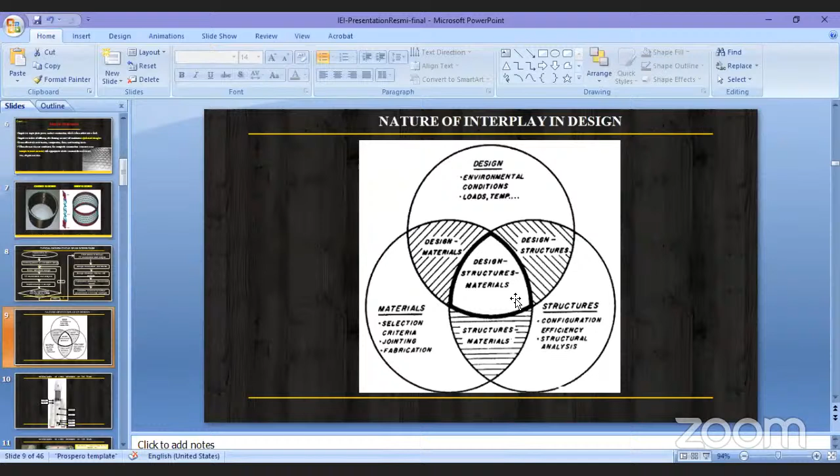We have to consider the lightweight aspect as well as stress available, depending upon the material we are choosing, what should be the limitation of stress we can go for, without any failure mode.

We have designed so many structures, but because of time limitation, we will only talk about two structures - the one-dual structure and core base shroud structure.

Coming to the interstage structures, this one-dual structure configuration itself - I have touched upon the different types of constructions available. This closely stiffened structure is this configuration type, and this diameter is 4 meter diameter and 1.6 meter height, made up of aluminum alloys.

This right side indicates our structural configuration, and most of these structures have different planned cutouts for taking out the propulsion systems and other activities. What we are seeing here is a helium gas bottle placed on the structure, for which we have to give support inside the structure also.

So these bottle things are the helium gas bottle, and these wires have to be taken out. So all these cutouts are introduced - some will be for wire tunnel cutout, and some will be acting as an access cutout.

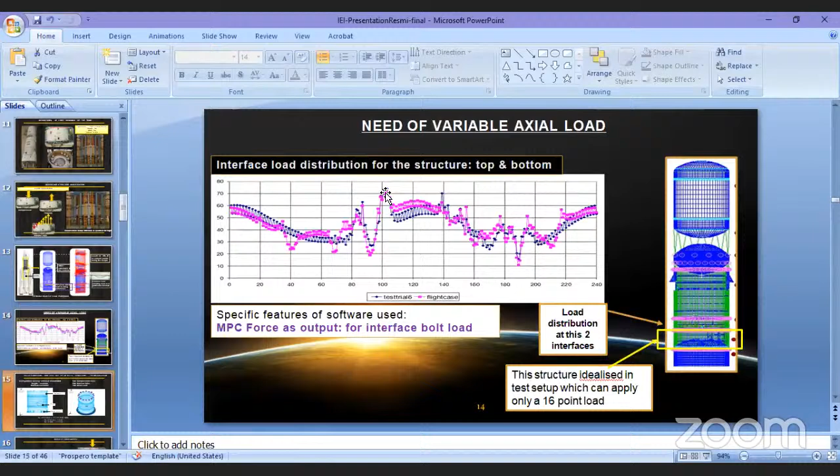And there comes a different software. We have expertise in many softwares available, like Patran, then Nastran as a solver, then Abaqus, then NISA. We also have an in-house developed software called FEAST, finite element analysis for structures. Since with bought-out softwares we have to pay for annual maintenance each time, we thought of doing this analysis also as a comparison with the in-house developed software, as a Make in India policy. So this is a representation of the FE model in that finite element analysis software.

And these are the loads we are applying, similar to what we have seen in the structural test setup. Similarly, some jack loads are applied. Same loads we are applying in that FE analysis, and the boundary conditions also applied. There are different kinds of elements, depending upon the structure, shell, beam, and stringers are idealized as beam elements, and shell as shell. Then interface fasteners are modeled as MPC, as I told earlier, MPC connections are there to find out the interface loads.

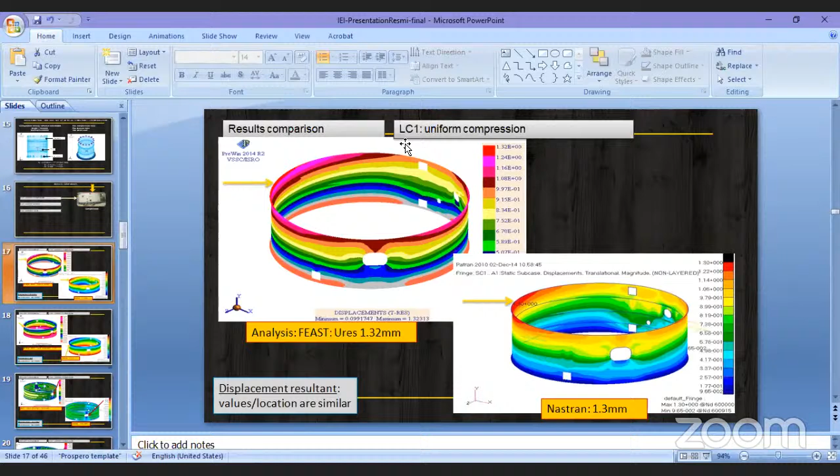And these are the comparisons of the 3 load cases we are touching upon, comparisons with respect to the finite element software FEAST. We have a comparison of the displacement resultant of 1.32 versus 1.3 in Nastran, and analysis also 1.32 for the comparison of the axial versus 1.3. And this is also against the stresses comparison, corresponding to stress resultant von Mises stress, and these are the circumferential stresses.

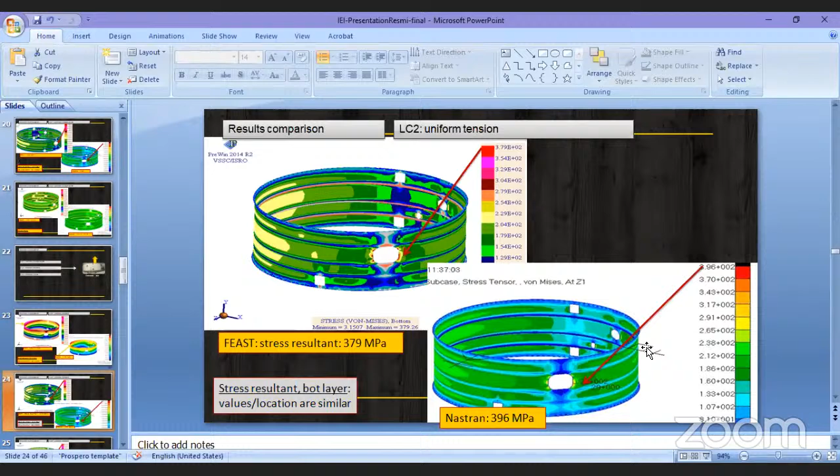And next case, we are touching upon the tension condition. We have a comparison for the tension condition also, 5.1 as a deformation against 5 in the Nastran package, and this versus stress comparison.

And for the cutout also, we basically have to see the cutout strain nearby. We should not exceed the capacity of the material. So we will be monitoring the strain during our structural qualification test also. We used to have a lot of measurements to know what is the actual stresses acting on the structure and deformations also.

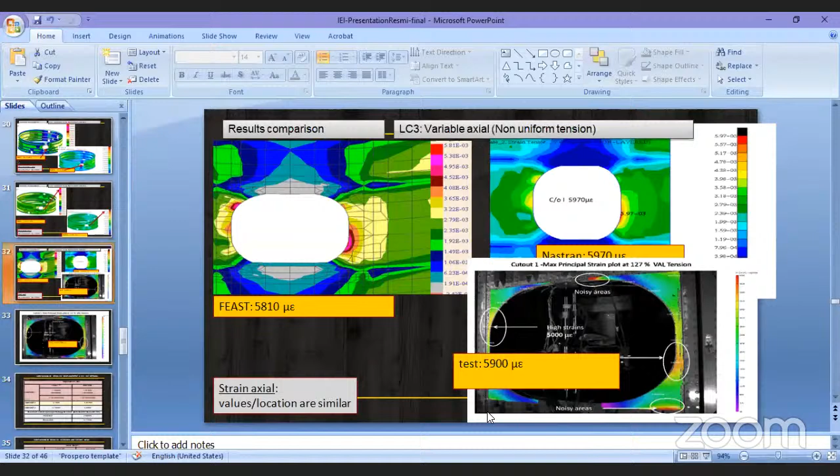And this is one example for the variable axial load, I was mentioning about the bending moment acting on the structure. Sometimes we have to go for a variable axial load also, and at that time also we got a good comparison. We have experimental setup also planned to measure the cutout strains nearby, and we got a reasonably good match with the prediction from most of the softwares.

And this was the overall comparison of this one dual structure, the displacement and the cutout, whether it is opening or closing. We may have to predict, as well as find out the measured values also. And this information is required for finalizing so many plans later also. Sometimes we may have to place some motor inside the structure, so this contraction, how much will be the contraction? Depending upon that, how much slot we have to plan, so all these things are required for our future work.

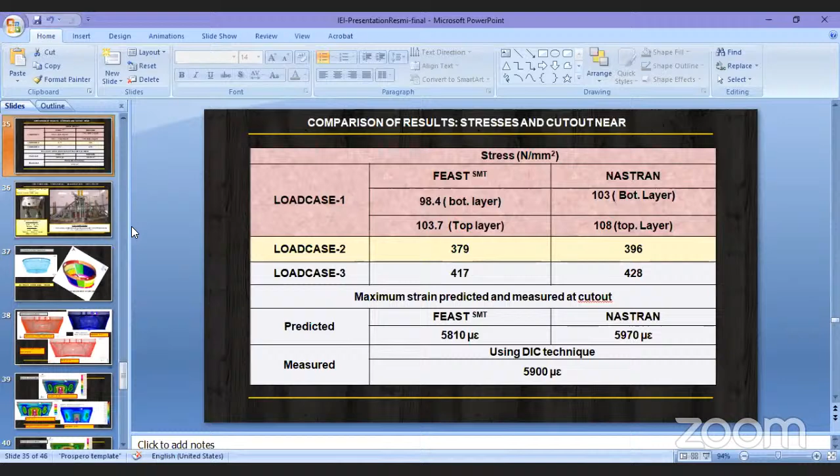So we will plan accordingly to measure all the deformation, whatever possible, from the one test itself. Because in one structural qualification test, hardware making, then test setup making, then structure, so many resources are involved, so we have to find out, we have to get the maximum output from our test itself. And coming to the CBS structure, this is basically what initially I was touching upon, the closely stiffened structure only.

This structure consists of a cylindrical portion that is closely stiffened and an isogrid conical portion. The left side indicates the CBS structure. These two engines are placed on the aft ring of the structure, because this is a twin engine configuration, and this twin engine will act as a local concentrated load. This local load effect should not be directly coming over the top, because the top is interfaced with the other tank structure only.

So we have to get a uniform distribution of the load at the forend of the structure. Our designers' job is to ensure concentrated load does not go through, and this structure also has housings for many engine packages. It has the yaw plane actuator as well as pitch plane actuators. These crosses indicate the yaw plane actuators, and the pitch plane actuators are also placed here to control the engine deflections.

At these locations where we are mounting the engines, we should have a stiffness criteria also, because the displacement is very much essential to know how much the structure should deflect, how much radial deflection is there, how much axial deflection is there. Accordingly, we can plan the controls for the vehicle.

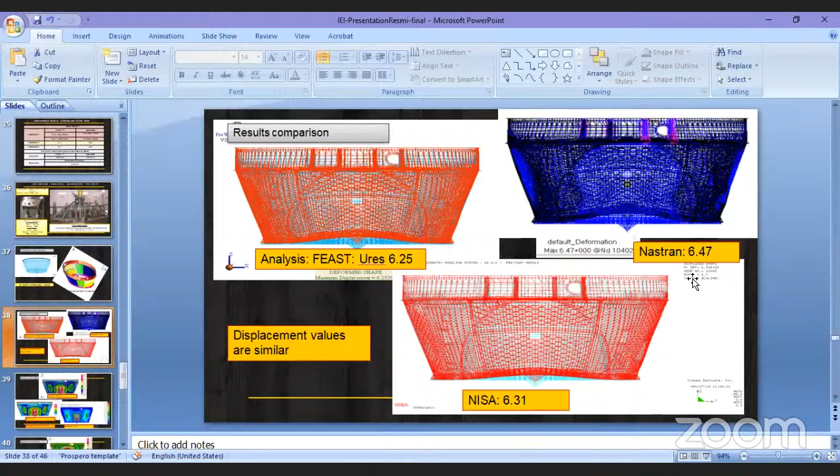These are the displacement comparisons. Again, this is the radial deformation. Right now I am talking about stiffness, which is a matter for the structures, about the CBS structure. And this is the stress comparison, the displacement comparison versus NASTRAN, NISA, and FEAST, and stress is also compared.

We had so many measurements in that structural test, as I was indicating, so the strains also we can get a comparison from this. From this we can infer that the maximum displacement matches very well between the three softwares, and the maximum strains also have shown a good, reasonable match during the qualification test.

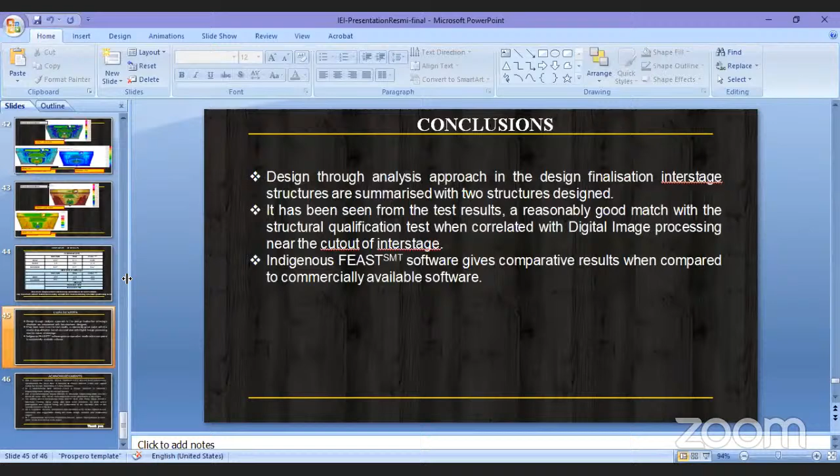As a conclusion, I could say the design through analysis approach in the design finalization of interstage structures are summarized, only 2 are mentioned due to the time planned for us. It has been seen that the test results show a reasonably good match with the qualification, which were also correlated by the digital image processing near the cutout of interstages. Indigenous software use is also comparable with commercially available software.

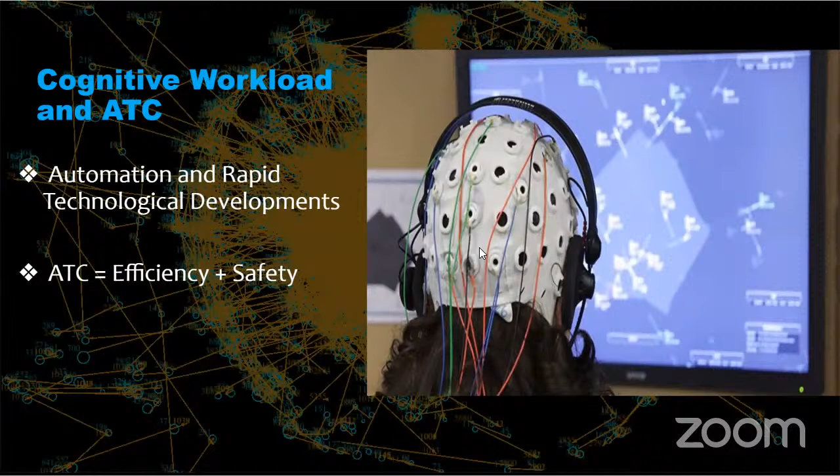It has a mediating factor, the air traffic factors. The mediating factors are the ones such as human factors, system factors, etc. Talking about the closed loop model, it says that the choice of work method regulates the input work further in a feedback loop and affects it again.

Operational constraints are restrictions in airspace due to weather, etc. Complexity can be modeled as the number of aircrafts currently in the airspace, traffic density, etc. In human factors, we can take factors such as age, skill, strategy, attention, memory, IQ, and so on.

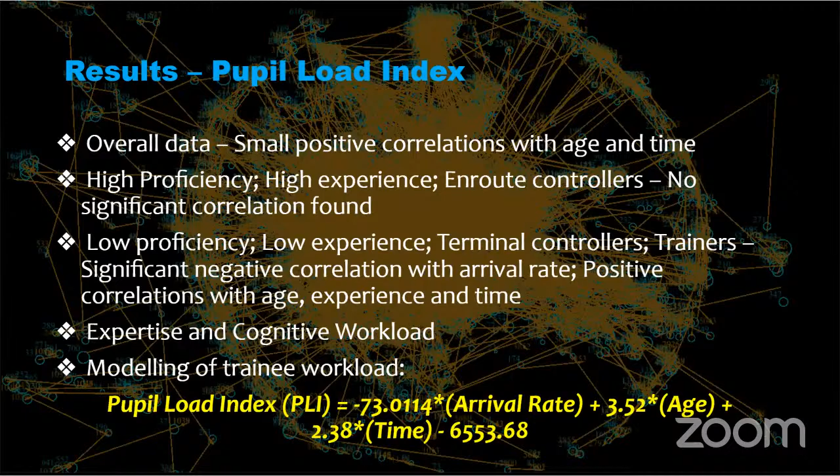We had a negative correlation of fixation duration with age, experience, and time. What this means is that with increasing age, experience, and time, people are less engaged with the simulation task, with respect to the air traffic controllers. The reason for this could be either of two sides.

For example, we can say that maybe older and experienced controllers have less motivation to do the experiment than novices, or perhaps with more age and experience, the task seems to be automated in their mental system, so they don't have to engage much at the task themselves. For controllers taking more time, they can feel fatigue and lose engagement with the task, or maybe they are doing the task in a more relaxed way, so they are not much engaged, and time is consumed in completing the task.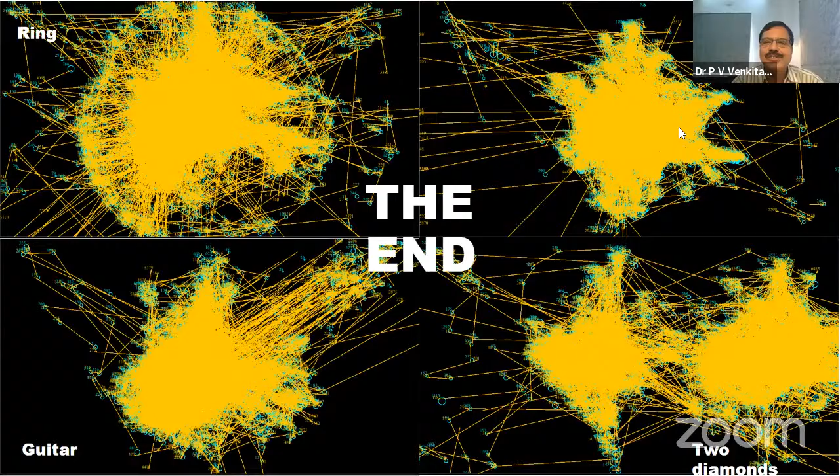Thank you so much. As I told some time back, Pant also was having a totally different domain last time when he presented. This also is a totally different picture, but all associated with aerospace and the aeronautical sector. So definitely it is a very important subject, and you touched upon the right subject and the right workload perspective of the ATC. It's a new subject, and I think the audience will be interested in knowing if any gaps are there, whatever they perceived during the presentation. It's open to questions now.

First of all, let me thank Sarthak for a totally different presentation. At least I am new to this subject, as I told some time back in the last presentation too. Modeling human factors into mathematical equations is very complex. I would like to ask him, how do you model the training aspects of, say, two people trained in the same class absorbing it differently and reproducing it differently? How do you model that part into the air traffic controller model, because experience and training alone have been getting into your model, but the way people take it differs - how do you model it?

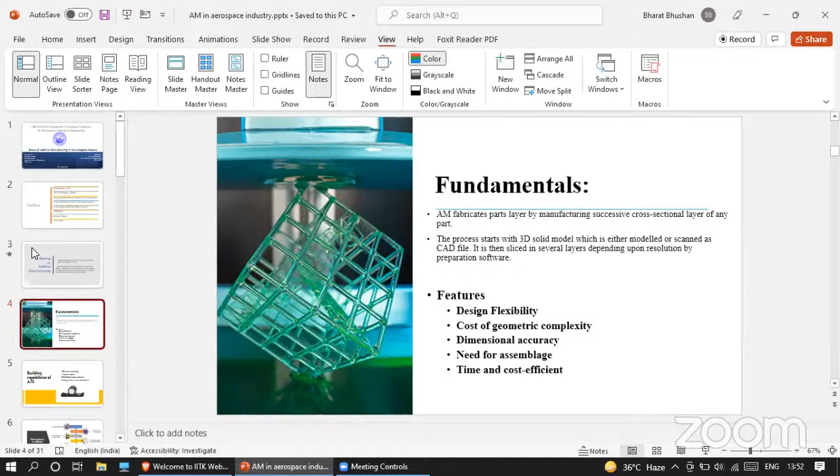So the capabilities: LENS, laser engineered net shaping, ultrasonic consolidation, and polymerization. These are all processes which enable functionally graded parts. Specific material properties like hardness, flexibility, stiffness, adhesive properties, and color basis can be designed. Physical working models, articulated models, compliant mechanisms, locomotive robots, and prosthetics, including a variety of pre-assembled parts and fully functional components like joints, fasteners, and flexure units are manufactured using additive manufacturing technology.

Embedding foreign components - what I mean is components like sensors, circuits, motors, and threaded rods are embedded into a part as it is being fabricated.

A combination of additive manufacturing and direct writing technologies is basically used in signal routing, conformal electronics, discrete electronics, 3D antennas, force sensors, magnetic sensors, and strain gauge sensors. So these are the fields where printing of circuits and sensors can be done.

So basically how it works: first the model is conceptualized, then the CAD model is generated, and then it is converted to an STL file. Then slicing is done, then we set up the machine parameters and materials, and the fabrication process of printing the part starts. Then comes removal, which is the post-processing technique I was talking about earlier - removal of support structures, and hot isostatic pressing for removing porosity. So these are the processes we do, and then the final part is ready to use.

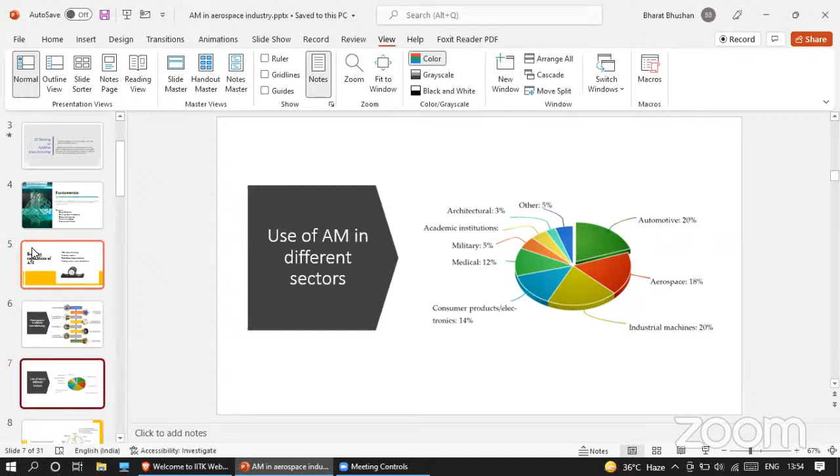There are a lot of methods which are being used. We will compare 4 methods used in the aerospace industry. One is laser powder bed fusion - these are for metallic parts - electron beam powder bed fusion, wire arc melting, and laser metal depositing.

Every process has its own advantages and disadvantages. When you look at wire arc melting, it has very less accuracy, however laser powder bed fusion has very good accuracy. So we have given marks out of 10 on how accurate each is, based on different parameters like complexity, accuracy, surface finish, overall cost saving, material utilization, post-processing requirements, mechanical properties, flexibility, and maximum volume. These are some of the parameters used to compare these techniques.

So now we are moving towards topology optimization. Topology optimization is the algorithmic process of optimizing a mechanical component or part, usually through material reduction. This is calculated according to the mechanical stresses the part is subjected to during regular function. It can be categorized as a subfield of a broader field of structural optimization. The main benefits include less usage of material, a sorted design process, and maximum performance.

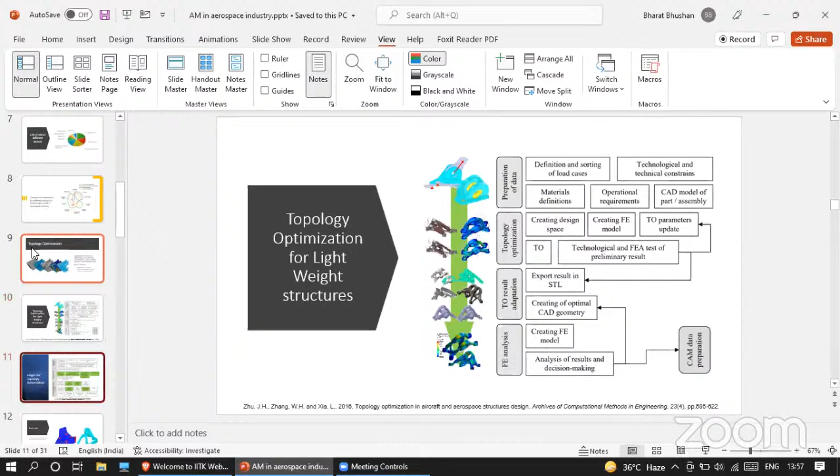Additive manufacturing opens up a lot of opportunities previously unavailable to traditional manufacturing. From the design point of view, it has become possible to use a bionic topology of parts, internal channels for cooling, integration of parts and functions for efficiency in weight, cost, and assembly, and lattice microstructures for lightweight applications and use in medicine as well. At the same time, due to the complexity of additive manufacturing technological processes, the use of additive manufacturing is not always cost efficient.

To increase the cost effectiveness of design and production, it is necessary to use special techniques of design for additive manufacturing and optimize the additive manufacturing technology process.

At the design stage, the initial part or assembly must be redesigned, taking into account the advantages of additive manufacturing and the capabilities of machines. In case of success, the redesigned part will have unique characteristics. We will look into the cost operation later.

Here is an example of a topology optimized part. This is an engine bracket with casting constraints. I'm not getting into detail, but what I wanted to show is that the performance of the bracket doesn't reduce even though the material has been redistributed and the design is being optimized.

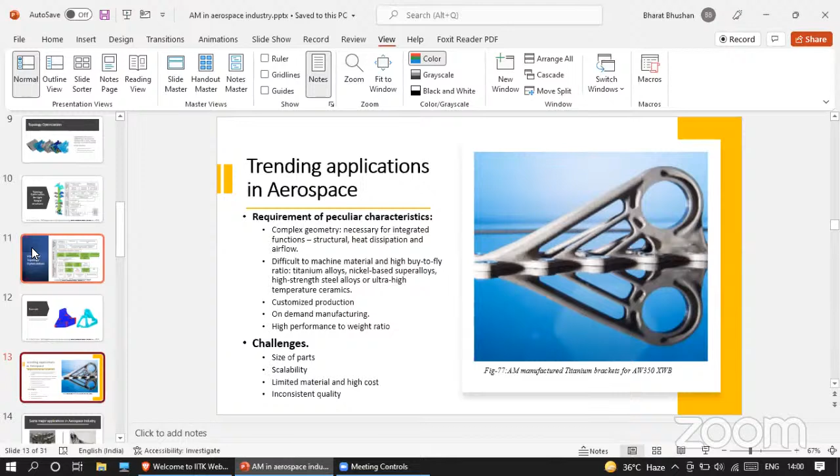Some major applications include a hydraulic manifold for aerospace, which is 3D printed, and a lightweight titanium structure printed by the EBM process. When we talk about the advantage of reduced complexity, this is only because of layer by layer manufacturing, so any complexity can be manufactured. NASA designed an engine fuel injector and reduced 115 individual subcomponents to just 2, because of 3D printing.

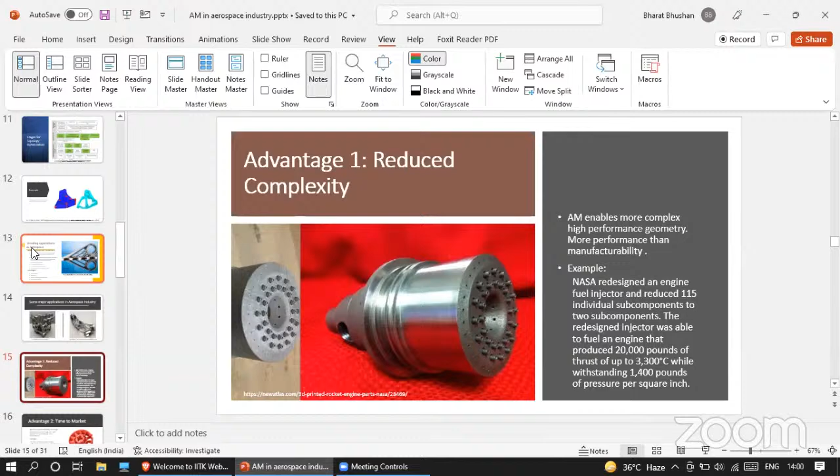The next is time to market. Additive manufacturing provides on-demand supply, which reduces the cost of inventory. So there's a demand, and the part can be printed and directly supplied to the market.

A manufacturer of educational laboratory equipment was able to print turbine wax mold patterns in 18 hours as a single component, in contrast to traditional multi-printing which requires 170 hours. If it had been done by traditional methods, it could have taken up to 170 hours, which is reduced to just 18 hours because of 3D printing.

Regarding cost reduction, I've been talking about increased cost, but however, to some extent, some methods of additive manufacturing also help in cost reduction. For example, a NASCAR race team adopted additive manufacturing to produce prototype parts for wind tunnel testing, and the team was able to slash testing costs by 89% due to elimination of scrap and lack of tooling creation.

It also helps not only aerospace, bionic components are also being manufactured. Siemens has created over 10 million custom hearing aid shells using additive manufacturing and claims they provide a better fitting product that improves customer satisfaction, because of the feature customization it provides.

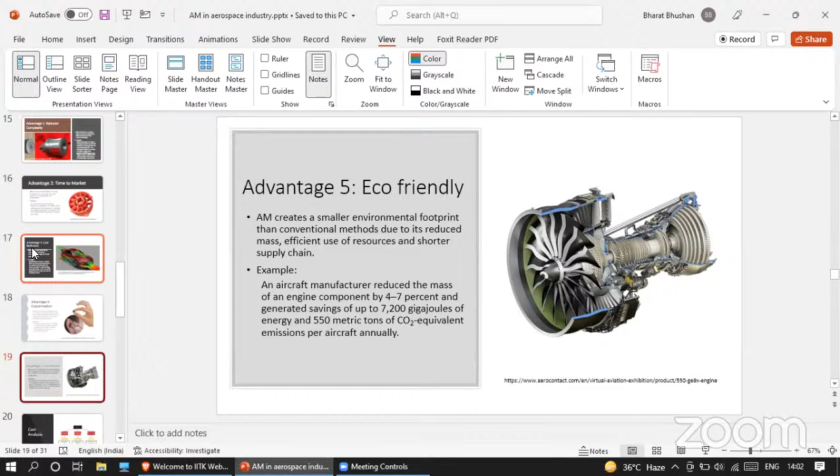When we talk about cost analysis, there are different perspectives we look into: management perspective, finance and accounting perspective, and manufacturing perspective. Management perspective refers to cost involved in material, administration, and capital. Finance and accounting perspective refers to intuitive, parametric, analogical and analytical direct and overhead costs associated with the manufacturing process. Manufacturing perspective refers to pre-processing and post-processing direct or indirect costs related to the manufacturing process. These will all be discussed in detail.

This is a general cost model, divided into certain stages. Stage 1 is file and material preparation. The process starts with preparation of a digital file containing the necessary data on product geometry, operating parameters, and quantity. Additionally, at this stage, the raw materials are prepared.

For powder materials, this can involve a sieving or blending process. For liquid materials, this may involve a material formulation step to obtain depositable materials. Depending on the process type and machine architecture, this step may also involve filling raw materials into cartridges or containers, ensuring these materials are kept under conditions that prevent degradation for a sufficient span of time.

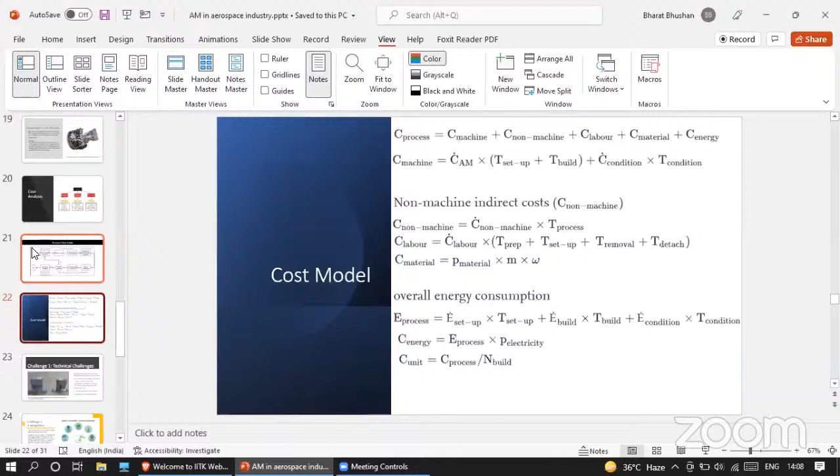The final step in this analysis is to break the process cost down to the unit cost level. Assuming the products manufactured are identical, unit cost can be expressed as C unit equals C process, the cost of the process, divided by the number of builds.

Now we look at the challenges, the technical challenges discussed earlier: very limited materials for printing, such as certain polymers, metals, and ceramics, and no standard for the additive manufacturing process. File formats obviously exist, we use STL files, but process standards and quality standards differ as every manufacturer has their own set. There is also a lack of proper surface finish.

Yes, we can talk about post-processing methods which can improve the surface finish, but it is still an area that needs to be worked on. It also increases production time. With additive manufacturing, the production time is very large.

So the next challenge is the IT integration. Since every CAD model has to be printed, the CAD model needs to be designed, and with increasing complexity, it has to be redesigned. However, IT integration has revolutionized the industry framework, and in times of Corona, AM manufacturing is also one of the possible solutions. With closure of international borders, an STL file can be emailed and the part can be printed wherever there is demand, making AM manufacturing a very good solution in recent times.

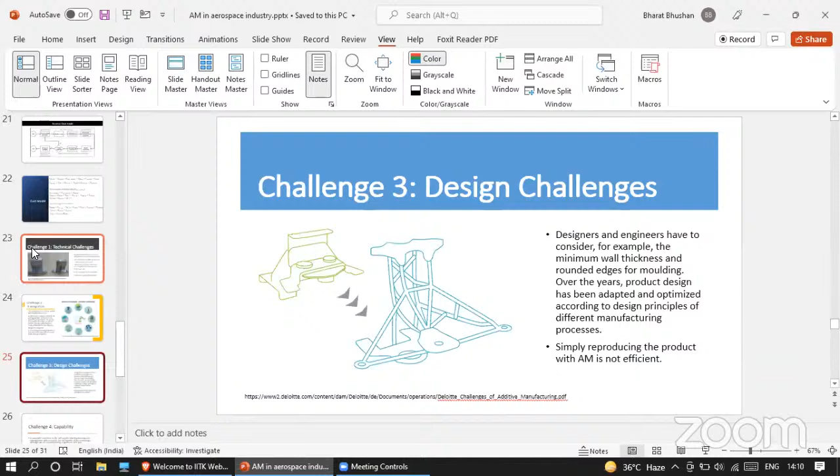The next challenge is capability. A successful transition to AM manufacturing will require new engineering and management skills to exploit the full benefits of this technology. We are currently facing a significant skill gap, so we require a skillful operator for additive manufacturing. Additive manufacturing is not a technology for specialist technicians like welding, but rather a field for generalists able to combine disciplines like mechanical, fluid, and material engineering.

The next challenge is the financial challenge. We have talked about cost models and how they affect the process. Industries have always tried to reduce cost without sacrificing the quality of the product.

So what is the development in the near future for aerospace applications? Multifunctional structures, meaning enhanced design freedom and innovation in shapes, weight, and material. By lightweight structure, we mean ceramics that will enable performance at elevated temperature, which can be used as piezoelectric devices.

With the use of functionally graded materials, tailoring of mechanical and thermal responses of the components and evolution of material compatibilities can be done. On-demand manufacturing is another feature that additive manufacturing brings, which will reduce cost and possibility of damage during storage, and also reduce inventory cost and lead time. Automated repair processes will reduce the cost of high value components during their lifetime.

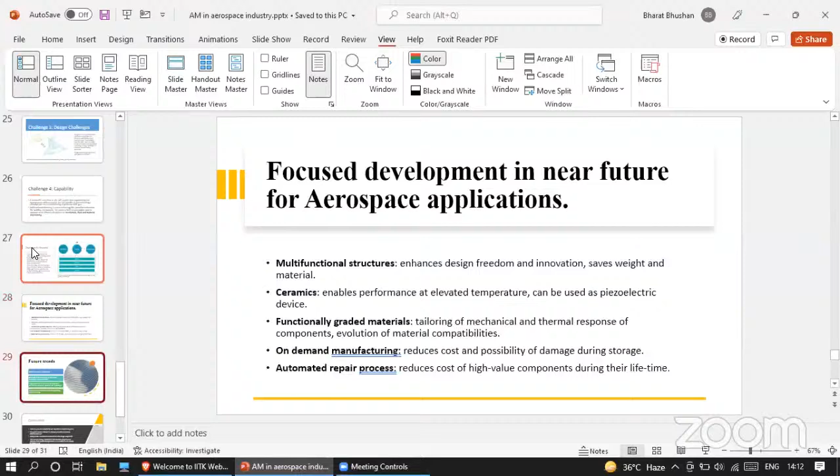In the future, desktop manufacturing can be possible because of additive manufacturing. Research at the intersection of products, process, and machines requires understanding how these three can be correlated. There's fragmentation of research investments and a trend towards a printing-all paradigm, like printing full assemblies and joints, so that every part, everything, can be printed. This can be the new trend for AM manufacturing.

There's a need for rethinking and reorganizing manufacturing, so new designs can be implemented through the use of additive manufacturing. With this, I would like to conclude.

Additive manufacturing will gain more popularity and importance in upcoming years. Designers can use software to simplify geometry and reduce material and cost. Additive manufacturing provides a solution to reduce cost with design complexity. The post-processing, mechanical, and structural properties for different additive manufacturing products is an essential field of study for our future work. The possibility of using new materials in additive manufacturing is always open; however, while material is currently limited, new materials can always be looked upon. To realize the full potential of additive manufacturing in the aerospace industry, a significant amount of work needs to be done for robust application. Thank you, I am all done with my presentation.